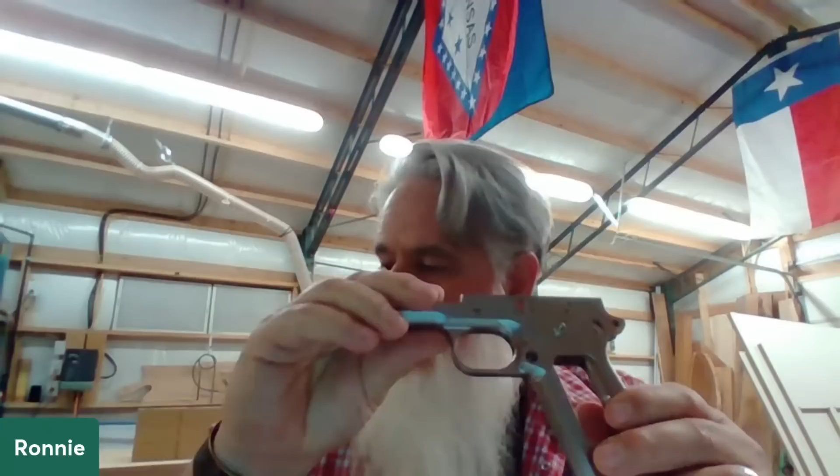And I've got kind of a grip here. The original file had some beveling off at the bottom for the magazine, and up here at the top, and on the back side, the flip side, it pocketed out a bunch of that. So the STL file I sent you later today has been cleaned up some from the original. I wanted to point that out in case you bring it up and ask where those four pockets went that we were going to remove. Okay, so I have the old and the new, so let's...

But having said all that, Laney, I would really like to learn how you take that first model and how I can manipulate it without having to get an engineer involved, if that makes sense. Yeah, absolutely, and that's great. What I'm going to do is compare apples to apples here, have the new and the old, and we'll look at both of them kind of side-by-side. Perfect, all right, so once again, here we go guys.

Let me jump up here in front of everyone for just a moment. Oh man, I still have the digital wood carver green going on, I've got to change that one day back again to our gold. Let's see here.

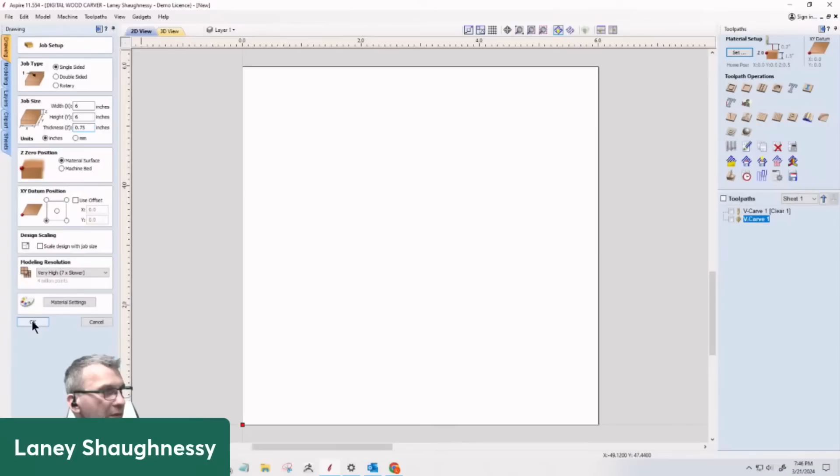And let's go 0.265. I'm going to keep that, let's see, 0.275282. Let's go 3/8, 0.375. We'll mill it down to what we need when we cut out the parts. Okay, so that was wrong. Let's go back in there one more time.

Hold that shift, and I want to set this to very high on my settings, very high on that model resolution. Now here's the kicker, ladies and gentlemen: you cannot improve the quality of an existing model. If the model is made in a low resolution and it's just a crappy model, you can't make it any better by turning up your resolution. So I don't know what these models are, but we're about to find out.

So we're going to go into the modeling tab here and import a component or 3D model. We're going to go with the original left grip from the other day for right now. When this comes in, it comes in upside down, so what we are seeing right now are those 4 pockets - we're seeing the bottom side of this model. So the first thing I'm going to do is get into a Z view up here in the top right corner.

Let me turn on my mouse so people can see where my mouse is on the screen. All right, so here's my mouse on the screen. We're going to get ourselves into a top view, so imagine we're looking over the table down on our board.

Now the model is currently in metric, so it's going to import in metric here. I'm going to scale metric to inches, millimeters to inches, to get us into our size based on what this model was created on. Now I'm going to hit mute on some of you guys' mics for now while I'm demonstrating, just so we don't pick up any TV noise and all that stuff. Once I've scaled the millimeter to inches, it brings me to what it was created in inches. I'm going to center this.

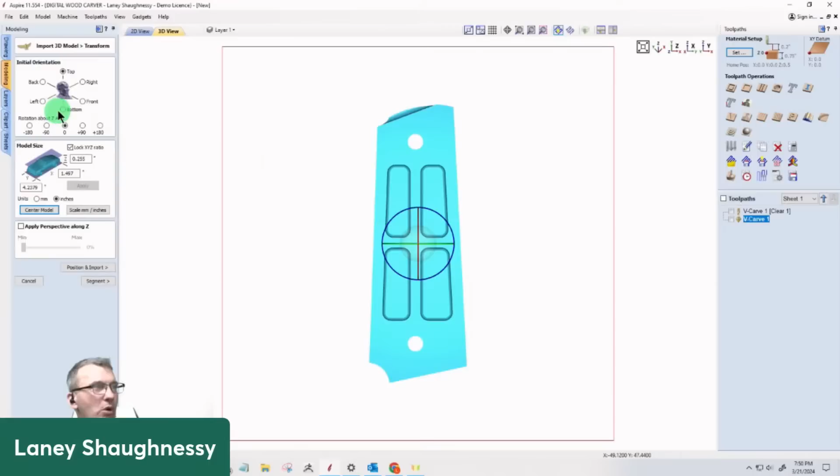Okay, now I do not want to be seeing the back side of this. I want to see the top side, but this top view they created it upside down, so I'm going to turn it to a bottom view so we're looking at the top side here. And I'm going to make sure I'm centered again, and position this.

I'm going to slide the slide bar all the way to the bottom, and discard anything below the 0 plane. If I look at it from the side view, there should be nothing below the 0 plane. The 0 plane is this black line right here. There should be nothing below it. So let's import that in.

Now, when it imports in and everything, let me switch my material for a moment. Hold that thought for one second. I want to just go with kind of a clean material for right now. We'll go with that.

Bear with me just a moment. There we go. I had some previous things in this project I need to go in and delete. Bear with me just a second.

Okay, hopefully everybody can see that. This is the grip that we brought in, and if we look at the back side, those pockets are gone. So we're not dealing with those, we don't have to deal with them.

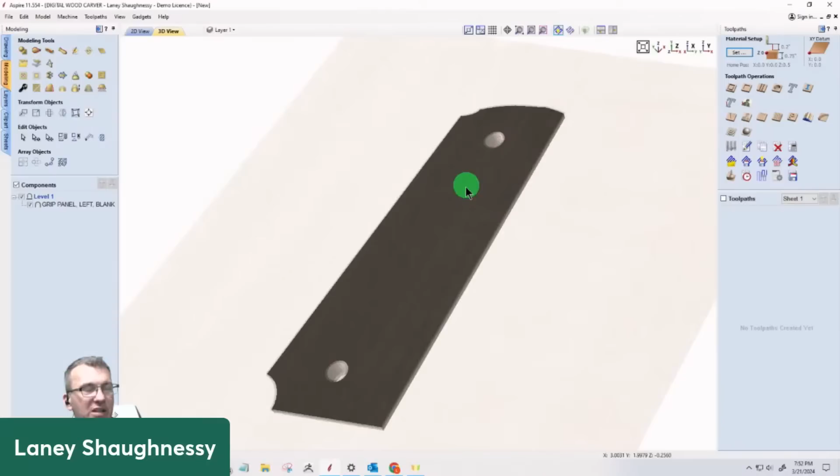That's kind of instantaneous on this. We're going to be cutting this out of the bottom of our material. Now, if we would have set this up as a two-sided job, and had it split to where those pockets were on one side and the rest were on the other, then they would be in there to deal with. But just by bringing them in, it erases them, anything on that bottom side, Ronnie.

If you needed them in there, then we would have to set it up as a two-sided job kind of thing, but I believe you're wanting to eliminate those. True or false? True. Okay, and in the new one, they are eliminated. Good, so that's just that simple. Upon import, they'll be eliminated.

When we bring that model up above, that single-sided job, everything on the bottom just gets taken out.

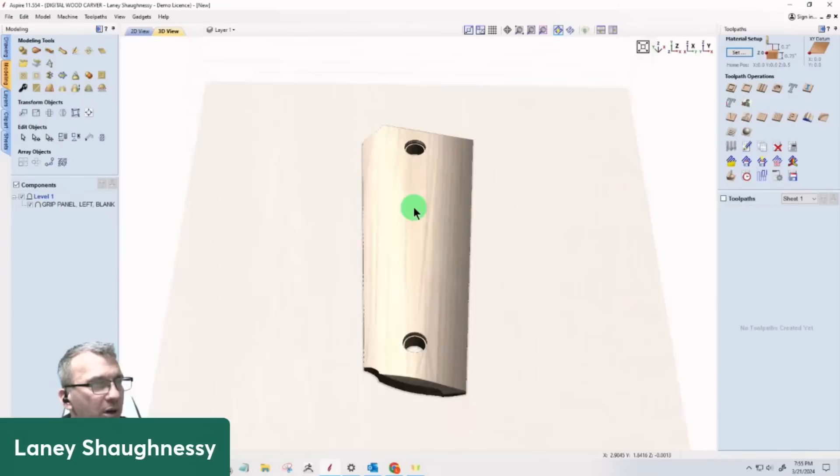Alright, and then we have our two screw holes. Now, these are part of the model, they've already got the screw holes, and they've got this recess and everything in here already. And we would have to try to find their dimensions and things like that, and see if they're on, right? If I say on, if they were created properly, proper depths, proper thicknesses, and all that stuff.

What I'm pretty much seeing here, Ronnie, is the way I would approach this is in the 2D view here.

I'm going to select on the model. So we have our grayscale here. The first thing I'm going to do is create a vector boundary, and on that boundary it's going to create my outline profile, and then my screw hole just on the inside of that hole. I don't necessarily need the outside because I can do offsets when creating the vectors myself, but at least I have a position location for them. Now, once I had those vectors, with the changes you're wanting to make, I would pull...

Let's try that again without the model selected. Let's turn that off. I'll hold the control key down and just drag out a copy here. So first things first, number one, you wanted to remove this cove.

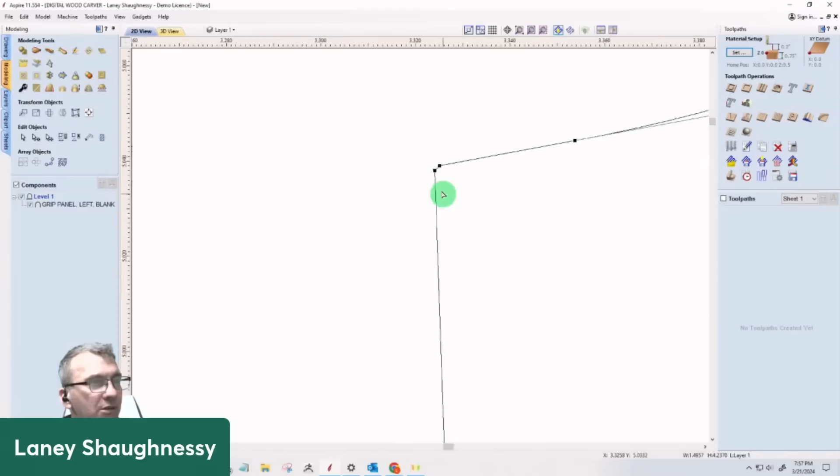I'm going to ungroup the vector, go into node editing, and zoom in. There's a little kick out there too - I'm actually going to take that all out. I'm going to cut the vector here, zoom in, cut the vector here, and delete that vector.

From there, I'm going to use the extend tool in the drawing tabs. I'll click on this vector first and this vector second, and it's going to extend and rebuild that corner.

Now once that's done, if I needed it rounded off, then I could do a fillet. Just as an example, so everyone understands what I'm talking about - first, I want to make sure it's a closed vector that I just created with the extend tool. And if I needed it rounded off, let's say for instance I want a 1/8 inch radius there, I can click on that and round it off. Do you know what I mean? If it needed to be.

I don't know if it needs to be or not, but that's what we would do. We would extend - the extend tool takes this line and extends it to a common point of intersection to recreate that corner. Then from there, if that corner needed to be rounded off, I could do that with a fillet tool.

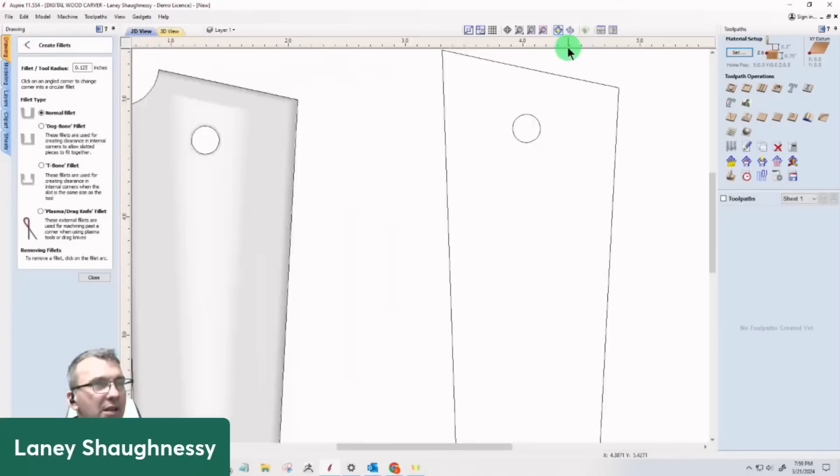Okay, now coming up here at the top, this shape - I'm assuming we still need this kick out and everything needs to be here, correct? Correct. Okay, now one of the things I would do is look at the condition of the vectors, make sure there's nothing crazy going on that's not supposed to be there.

When we're looking at the model, if I zoom in on this grip, let's go to the 3D view. Let me spin this around this way, zoom in, bear with me. I don't know if you can see that little booger there - it shouldn't be there, it's a piece of material that doesn't need to be there. But when the vector was drawn, it tried to outline that. So once again, it does not need to be there.

We're going to go into node editing, come over - let me hit close. Zoom in, we're going to go in and cut the vector. I'm actually going to cut it back here, over here, get on our corner, cut it there, delete that corner, and then again use the extend tool - click on this line first, this line second, to rebuild that back corner.

So does it always make a difference, the order of where you click on that? Nope, does not make a difference which line you click first.

Basically what's happening - let me undo that for a second - if I hover my mouse in the extend tool here, you'll see it shoots this line out to infinity. And if I hover my mouse here, you can see it shoots that one out to infinity too. Well, there's going to be a common point of intersection. What this does is, if I click on this line first - and it doesn't matter which line I select first - and I click on this, basically where those two lines intersect, that's where it creates them to.

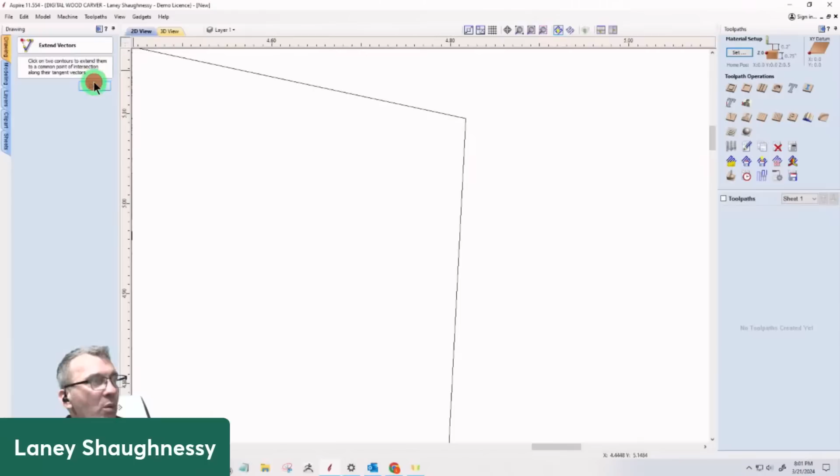Now, what we always want to do after extending a line - it doesn't mean we actually joined the vector. So we always want to follow up with the join tool and make sure it did close itself. If not, just hit join and close it. Okay, so we've redrawn those two corners.

For the most part, everything looks good. But what I would feel more comfortable doing is, because of these little zigzag edges of the model, the lines where the software traced the model trying to draw those lines, what I prefer to do is in node editing, delete this span, and rejoin it with a straight line. So I'm redrawing that line, which gets rid of any zigzags that might have occurred in the model.

I'm going to do the same thing over here. I'm going to delete this span, and then rejoin with a straight line. All I'm doing is making sure that my vector line from point A to B has no funky deviancies because the model had some pixelating, you know what I mean. So I'm not going too crazy with that, but that's what we're doing here.

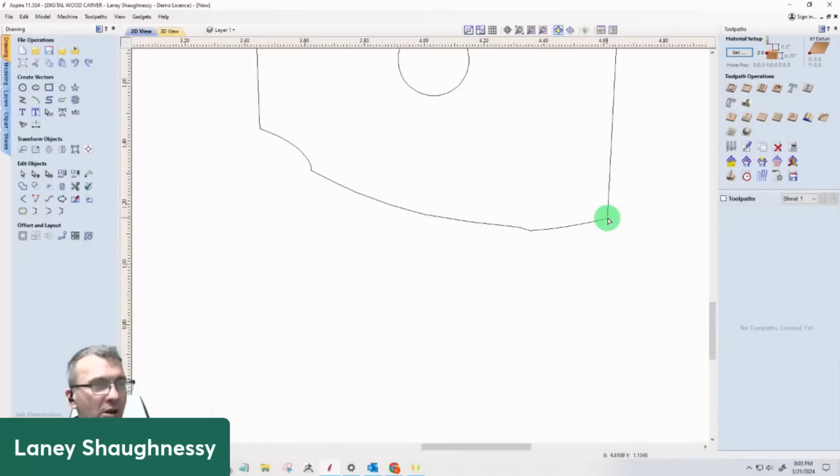I do not believe it should be just a single arc from here to here. I do believe it has a step down. And if you wanted to verify that, Ron, it's on the back side of the handle. I believe that is the back side. Yeah, just off the backside corner there's a slight step down before it goes into an arc. Is that correct? That is correct. Okay good, so we want to keep that.

Okay, now on our inside holes, Ron said the screw head pocket, which is the outer top, let's call it the countersink, has a diameter of 0.304 with a recess of 0.052. And then the screw hole, which would be the inside hole, has a diameter of 0.232, right?

So if I select this circle here and we look at the size tool, we're pretty close. It's not a perfect circle because, again, it's a tracing - the software tried to trace what it saw, right? So it's 0.2371, at least we're in that 2.3 range, right?

But we're actually going to run - I'm going to go with your numbers on these holes. So I'm actually going to select both of these, and I'm going to check the box that says scale the items individually. I just want to do them both at the same time.

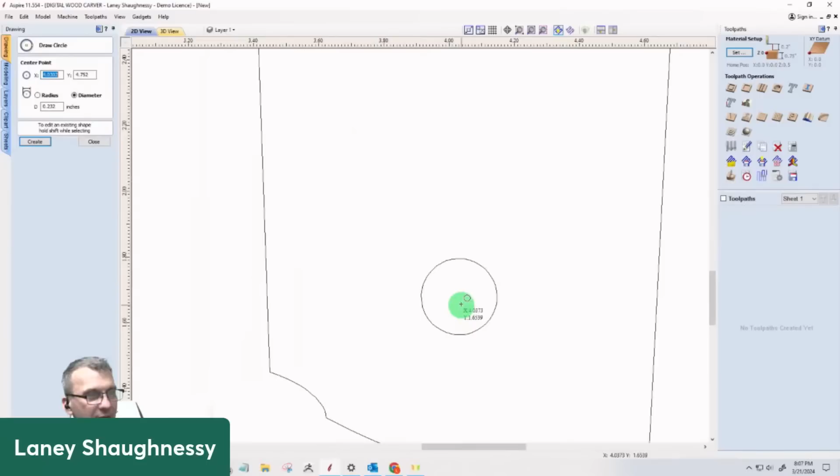All right, let's go back over here. Circle tool, 0.232, get right to the center of it, it'll snap to the center. Click, zoom in, find a place where it deviates so we can select. See, there's a bad deviation there. We can select the other one. Select that outer bad one and delete.

Now I know this is 0.232. Now I know when I offset this outward, when I select that circle and go to the size tool, I'm at 0.304, right? Clean up what needs to be cleaned up and never take anything for granted, right?

So I did the trace of the model. It created what it saw. I thought, hey, we're off by a number, let's change the number. Still working on that vector that the software traced, right? And there was still some deviation, it changed it down to the 0.232 size, but there was still some deviation in it. And when we offset it, that offset got deviated as well. So we created brand new clean circles, offset, everything is nice and clean. And positions and all, we're working off of the original vectors, we're just snapping to the center of those things.

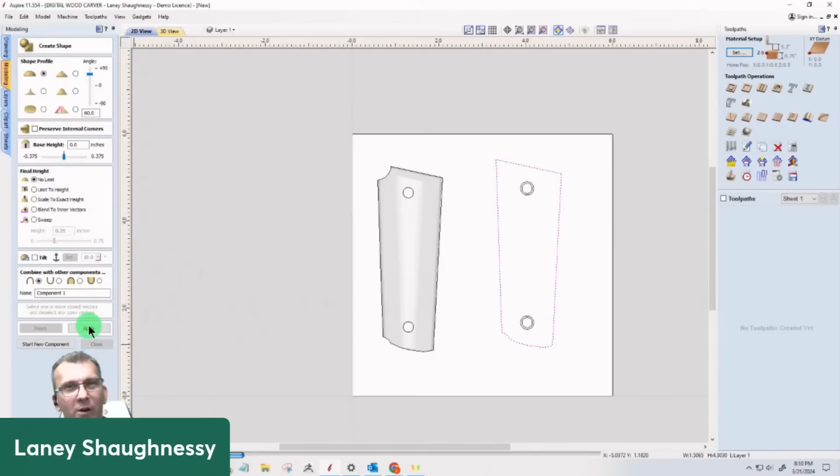Look at this in the 3D view. Oops, hold on a second. Let me recreate this. Hold on a second, all right, and then we get into the 3D view of this.

What's happened is basically we kind of created a pillow top, if you will, because this is a closed vector, it's trying to dome both sides of the corner. So on each one of those ends in the four corners, it's trying to create a dome this way and this way until it gets to the middle, to the main dome, and it creates what's called a pillow top, like a cushion on a pillow. We don't need this. This grip needs to have a nice arch, a nice shallow arch to it. So we cannot create the shape on the closed vectors.

We need to kind of open them up. And what we're going to do is the arc here, we're going to go with the height of the grip, we're going to use the number 0.265 as our height. And based on the width between the lines, how they're wide on this end and narrow on this end,

we're going to do a 2-rail sweep. And when the arch that we draw sweeps, it will scale itself accordingly based on how close or far apart the model is. It'll take the proper taper that it needs for the height. We're slightly higher on this end than we are on this end, but it's not much, just that slight kind of taper. There's not a whole lot, it's pretty consistent, but there is a little bit of deviation.

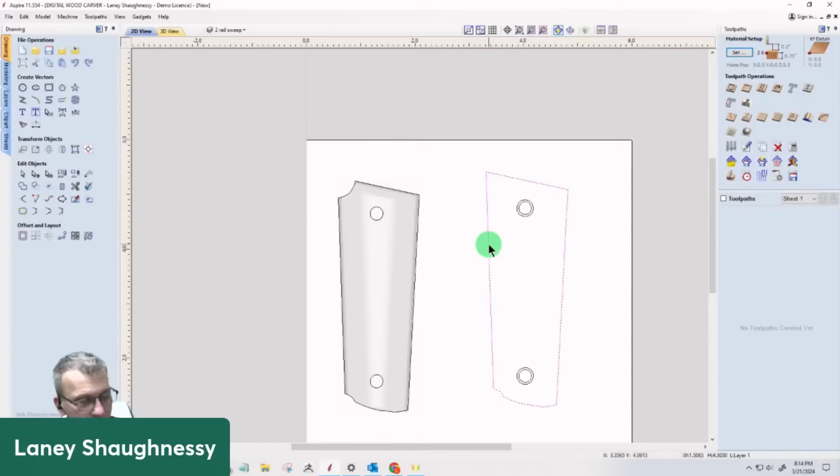As long as that layer is active, when I copy Control C, Control V, it's going to paste that copy on that new layer, so I can now turn off mine. Did it not copy onto the new layer? What's up with that? All right, that's okay, I will sit there and move it to that new layer. Sorry, ladies and gentlemen, I thought it would copy right onto that active layer. It should have, I think it should have. I don't know why it didn't.

But now I can turn the originals off. I need them, they're not going away, I can just turn them off. Now I can come into node editing and cut the vector. By the way, everything that we're doing on the left, rinse and repeat for the right, or you could mirror this as well too for the right. It doesn't matter, but the right might have some deviations depending on what type of slides and accessories and all, so keep that in mind too.

But I want to come back to this corner and cut the vector there and cut the vector here. Now, I just need paths, right? So I'm going to, on these copies here, just get rid of the ends, keeping my paths the same, but I need them to be a little bit longer because when I clear everything outside of the original vector, I need something for it to be able to erase. I don't need it to go right to the end of these lines.

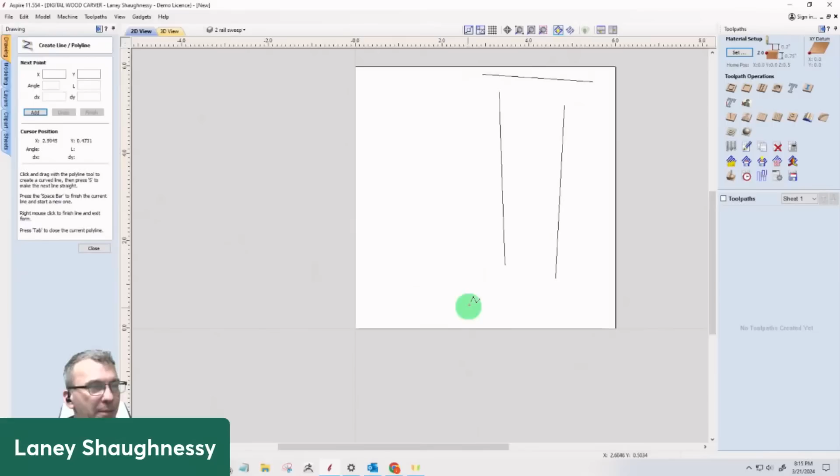So what I'm going to do is draw a line across the top, doesn't matter where, and draw a line across the bottom. I'm going to use my extend tool to extend this line to here, that line to there, this line to here, and this line to here. All I'm doing is making them just a little bit longer, same orientation that they're heading, just a little bit longer. And then once I've done that, I'm going to take the select tool and get rid of the ends. I still need the two rails to be open for a two rail sweep.

Now we are going to create a profile. Ronnie said that the grips have a height of 0.265. Now, there's not just the round at the top, there's also a little bit - I mean it's so small, but there's a little bit of straight meat kind of, and then it arches into the arch on this grip. So we've got to take that into account. So what I want to do is not account for it in my arch, but when the model's done, I will add base meat to it last.

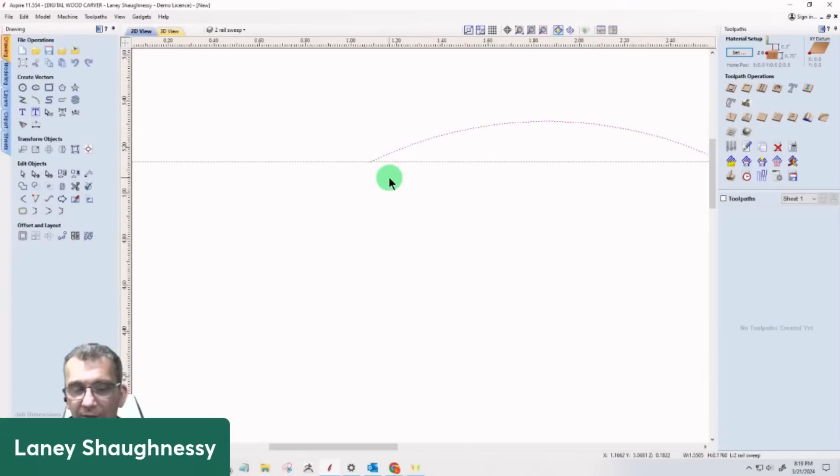Go ahead, Charlie. If you're talking to me, Charlie, turn your mic on. Charlie, are you trying to talk to me? No? Oh, he might be on the other line. I don't know. All right, Charlie, I thought you might have been talking to me.

Okay, so on my arc height, I want it to be at least 0.2.

Okay, ladies and gentlemen, this is one of those times where I'm not frozen. You all should be able to see me and everything, but my computer that runs the design software has decided to lock up. And it's one of those things that when it does that, it is locked up. So give me just a second.

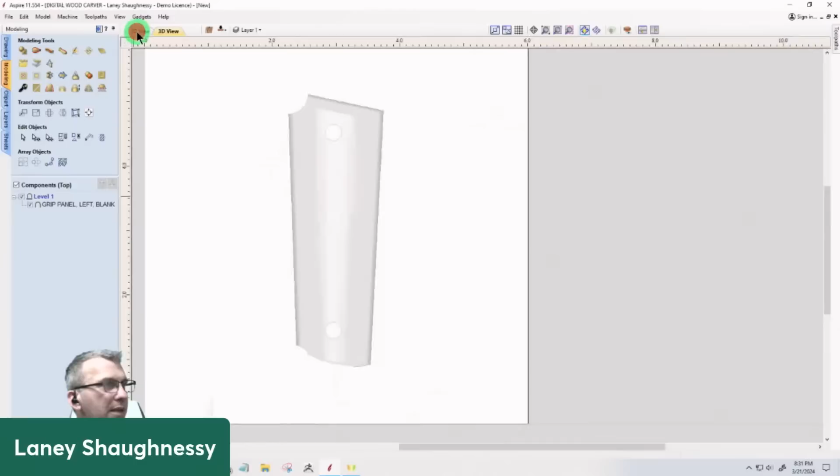Okay, all right, in the 2D view I'm going to trace the component. I'm going to take that and slide it over to the right. Select my vectors there, hold down the control key, drag that back over here.

We're going to ungroup that. We're going to go into the circle tool, 232 diameter. I'm going to go ahead and snap to the center of this, come in there and get rid of that. Stand by, there we go. Circle tool, snap.

Now, that's not your outside diameter of the circle, was it? Did you change the setting on your circle when you clicked into it? Give me just a second - stand by to answer that question, give me a moment.

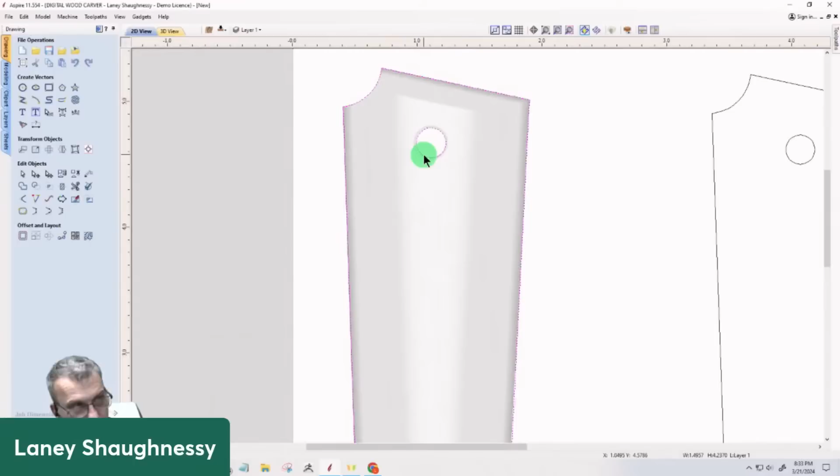.232 is my inside diameter. That inside diameter, John, which should be 0.232, yeah. 0.232, so this circle here, ungroup, was 0.2394. And so this 0.232 was just snapped to the center of that, in the copy, and just put in place. With me? I know it probably looks different from the first go around, right?

Node editing - we're going to cut the vector on this corner and this corner. And I'm going to use the extend tool to extend this corner here.

Okay, now I'm going to go into node editing. I'm going to cut the vector here, and here, there, and there.

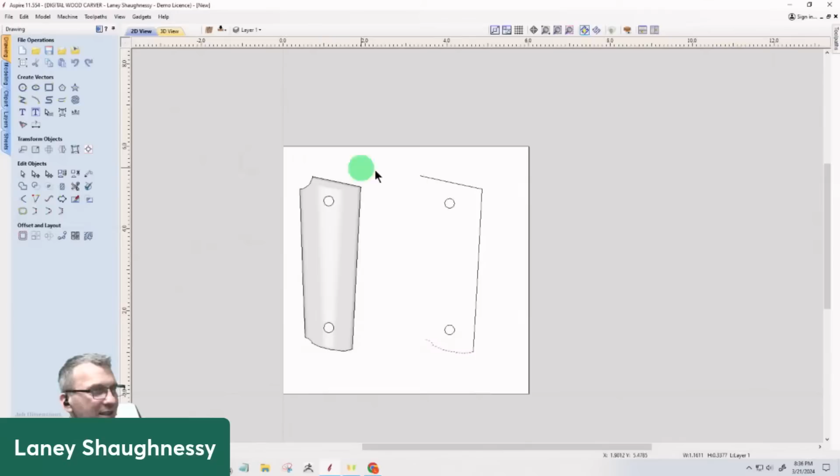Okay, so that - I'm going to, bear with me a second - I'm going to connect those two together just for a moment, so that way I can join this with a straight line on one side. There we go.

And then go back into node editing, cut that vector on the other side. Cut that vector, delete that span - could have just deleted the span, that's fine. And then join with a straight line. Okay, so this is where we were up until we selected this.

Control C, Control V, copy, paste, and then I'm going to move this to a new layer, and I'm going to call this my 2-rail sweep.

Can I ask a quick question, Laney? Yes. Did you create the recess? Not yet - the offset for the holes? Not yet, yeah, just take a hole right now. So we're going to do that. We'll do that, let's do it right now before we copy and paste. Well, no, that's fine, I could have copied and pasted because that's just the 2-rail sweep. Give me just a second.

Okay, let me turn this one off for just a moment. All right, on the holes here, we're going to do our offset in outward direction, and that'll be the vectors for the recess. To create the offset, we take our 0.304, subtract the 0.232, the answer gets divided by 2, and that number gets offset, and then it creates that offset for a total of the 304. So when we select this, when we look at the size, we should be at 0.304.

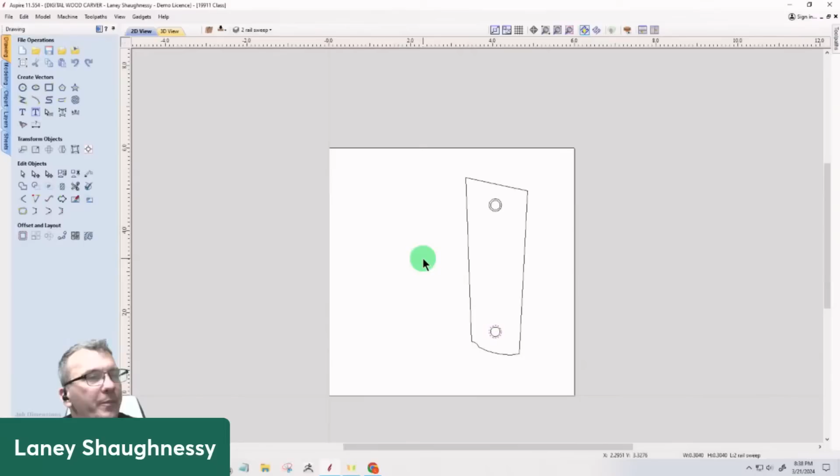All right, now the copy here that we're in, I'm going to go ahead and draw a line up here, draw a line down here. I'm going to go into node editing, and I'm going to cut the vector on this end.

Did someone just call my name?

I'm going to cut the vector on this end. Get rid of that, I don't need the holes there for right now, those are on the originals. I'm going to use the extend tool to extend my drive rails for my 2-rail sweep, just to make them longer. The only purpose for doing that is to make the sweep slightly longer so I can trim it to size.

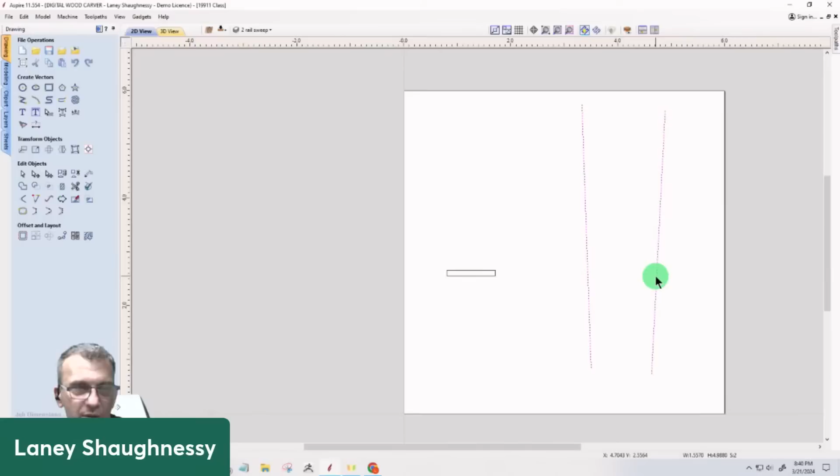Now let's look at John's method here. Our overall height is going to be 0.265. Now my overall width on here is 1.557, and the actual width of the grips and everything, according to Ron's numbers, is 1.572. This is the width of the grips based on the model. So we got to figure out which one of those we're going to use, but for right now I'm just going to use this. So 1.557 by 0.265, that's what my rectangle here needs to be.

1.557, 0.265. Not that, make sure you have the right vector selected when you do stuff like that. 1.557, 0.265. Okay.

Now John was describing that he would create his leg. So let's say I have a straight line, and let's say that line needs to be a 16th of an inch. So I'm going to create a line 0.0625 inches tall. Give me just a second, I'm going to do it. My mouse is shaky. And then space bar. I'm going to select that line.

First, I'm going to draw a middle line here. Let me get a middle line right there. Don't do that - if you're going to draw a middle line for flipping and mirroring, make sure it's straight as an arrow. Okay, I'm going to take this line I just drew, select this center line, and mirror it by flipping about that line. So it puts another one over here, and make sure that we're flipping a copy.

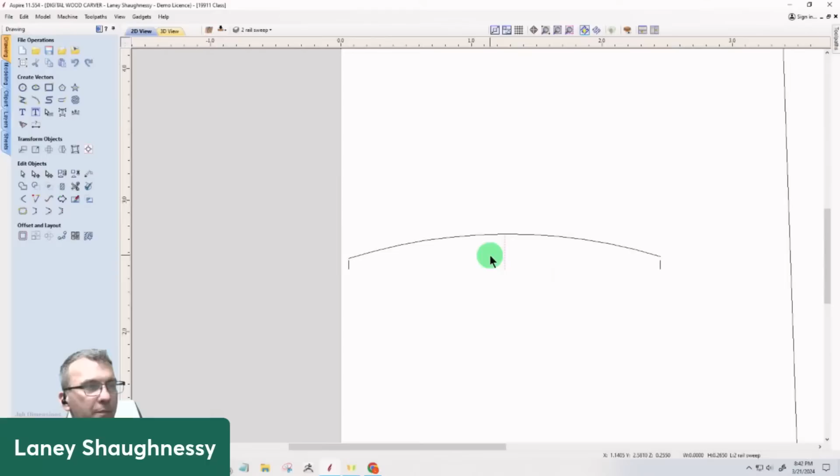Now John takes his arc tool at that point, and he snaps to the top of those lines and then pulls an arc up to the height of his box here. And when it's all said and done - I missed my mark. Hold on a second, let me go back to my arc tool. Let me get rid of this line for a second, I don't need it anymore now. Arc tool.

Make sure that we are snapping to the end of our lines, ladies and gentlemen. Am I in the line tool? Of course I'm in the line tool. Arc tool would help. Let's do it again. Get in that middle. And now I should be able to get rid of that box. All right, close enough - not really, just kidding.

Why is my snap - we're going to try this again. There's the end point, I'm confident on that one. Let me zoom in, get close and personal with this. That should be my end point. All right, third time's a charm. I'm happy with that one.

And so John would take that and make sure it's one vector, those three vectors, and that's what he would sweep along the 2-rail sweep. Am I correct in that, John? In what you were describing? Yes, I would make one for the top and one for the bottom, and then sweep it across it.

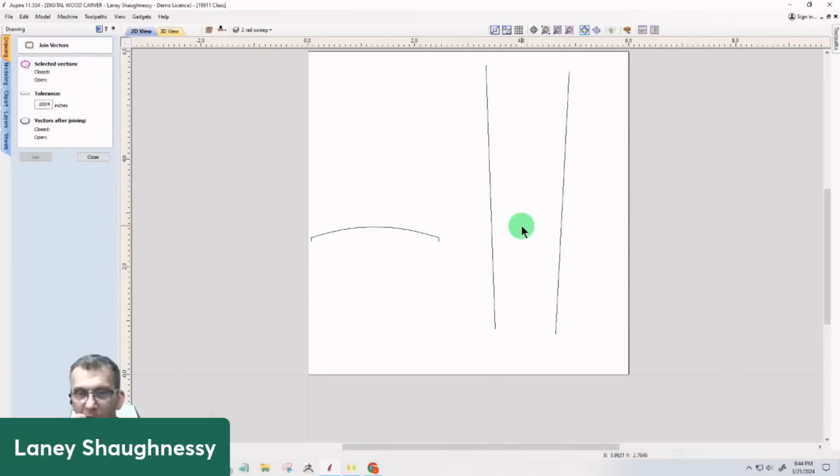One for the top and one for the bottom. Yeah, like one on the very top of the two lines and one at the bottom of the two lines, because the bottom is narrower. I could be wrong. I get what you're saying. And if we make one for the top, one for the bottom, then when we're in the 2-rail sweep, we don't have to use the option to scale the cross sections with the width. We can tell it to keep its current scale, right?

Because what I do is I take and click on the profile, I guess you would call it, and then click on the line and place it on the line, and then take the other one and do the same thing. It's probably what you're doing - you're just doing it the easier way than what I do it.

When we use our drive rails here, just know that when I have this scale cross section with width, it's going to scale this down to that second copy you're making. If I wanted to not scale and keep a consistent height all the way across, I would create the two, and that way it stays based on what I scale it to.

When we do it this way, with our 2 rail sweep, when we look at the 3D model, it creates that curve. Now that 16th, according to from here versus here, that's a lot more than a 16th of an inch on that side meat. So that is a significant difference between the two as far as the thickness is concerned.

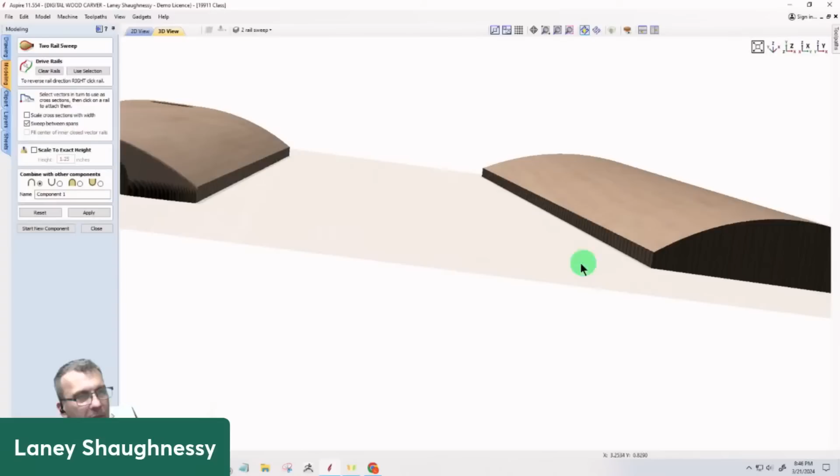Now, because I did not scale with the cross sections, this brings me more in line here on the back side, but on the front side, no. This is where John's method of creating these two, the transition between the two, comes into play.

With John's method, since I'm not using the scale cross section - because the scale cross section doesn't give me the right heights - if I turn that off, then John's method... let's get rid of that. Does it matter that your profile is wider than the bottom up at the top? That whole profile looks a lot wider.

It is a lot wider. I think you had the link on for XY when you were setting that box. Hold on a second - when I was drawing the box? Yeah, I think the link was on. It should be... hold on a second. 1.557. Yeah, and when you set that and then change the height, 2.385 - that's much wider. Hold on, let me do this again.

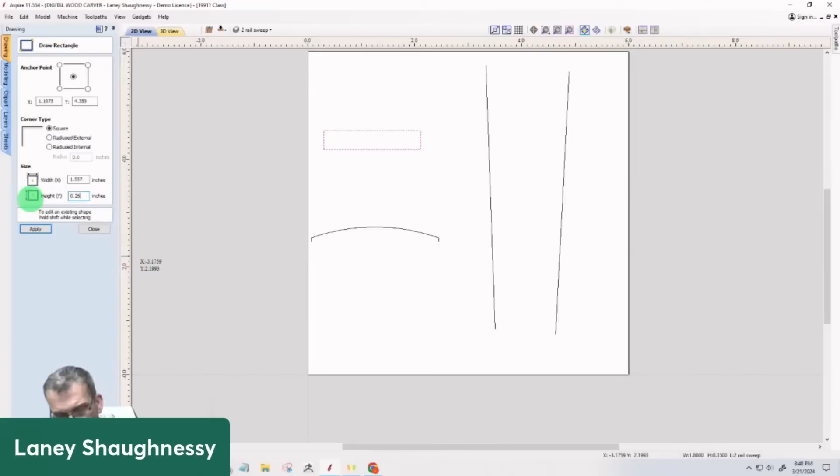Okay. 1.557. 0.265. That's my box.

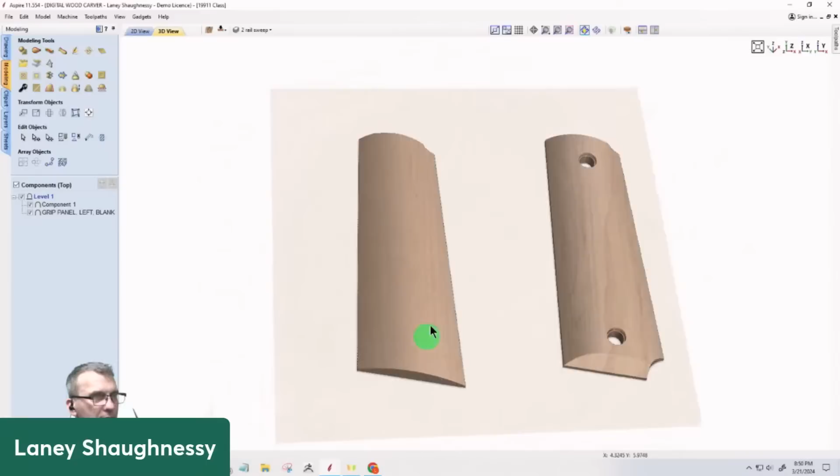All right, so a little bit more meat height is what we need, because that is my 16th that I drew there. You said what, 0.08 what now? 0.088. Okay, 0.088 minus 0.0625 equals...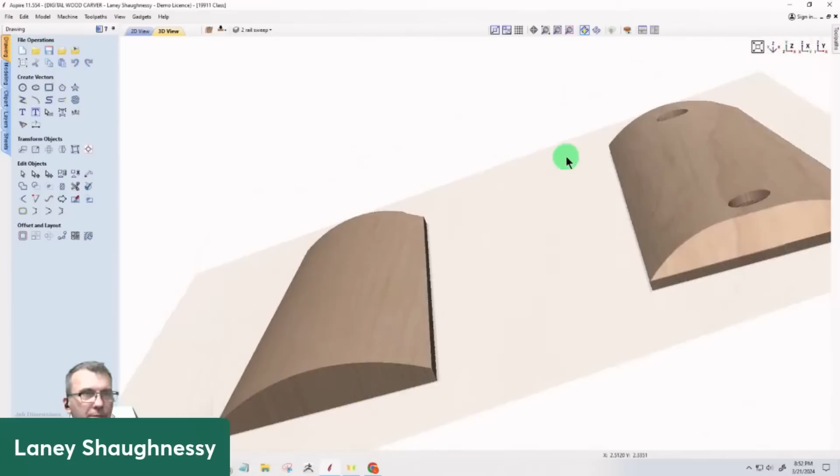His back end looks like it's got a flattening on the top. That end, right - there's a chamfer. Well, no, I mean see right where the screw hole is? It looks like it's flat right there. If you look at that end profile... maybe not, maybe it's just the way the picture looks. See where yours looks real hard.

Yeah, there's a piece of grain - I don't know if you can see the dark grain right here. It gives it kind of a flat appearance, and also the chamfer gives us that optical illusion of it being flat here, but it's arched.

Okay, all right, now let's take a look at if I were to select this and look at the overall height of this - 0.255 overall. And this, 0.257 on the shape height.

And then that 0.08 shape height is from the top of this straight edge to the top of the highest part of the model, 2574. And then this meat here is that 0.08, whatever it was, 0.08 something.

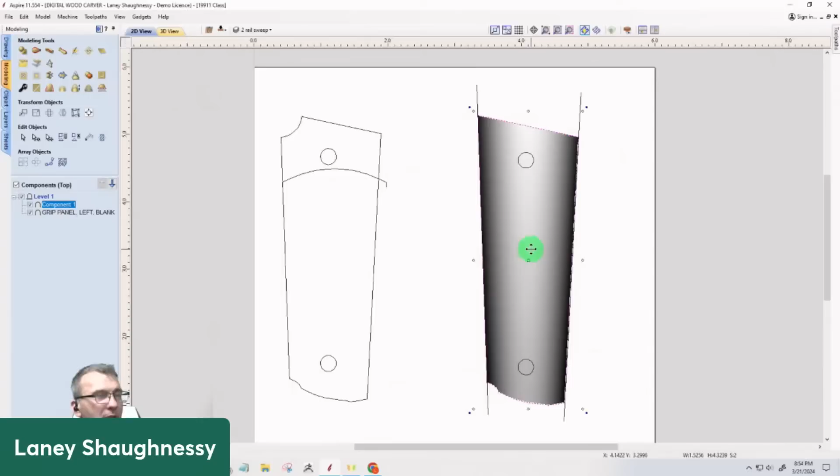Okay, so this is going to be our model height here. Now the holes and stuff aren't here - they're screw holes and everything. Make sure our vectors are turned back on. The model here, I'm going to go ahead and move this model to that layer 1, so I can turn off the 2-rail sweep vectors and everything, and the model - I'm going to go ahead and turn that off just for a second.

My offset little screws, when I hit undo, my undo disappeared on those. Give me just a second to save. But let me go offset outward. There we go. File save. And let me take those vectors and move them back to layer 1.

All right, I've got the model turned off for the moment so I can see the vectors. Now, the recess that goes over the pegs on the back side of this model - I'm going to assume it's the same size as this 0.034 recess here, but that would probably be the wrong assumption. If I go into the original model and look at this in the 3D view, it's not really going to show me that other side, because when I imported the model, I didn't import both sides.

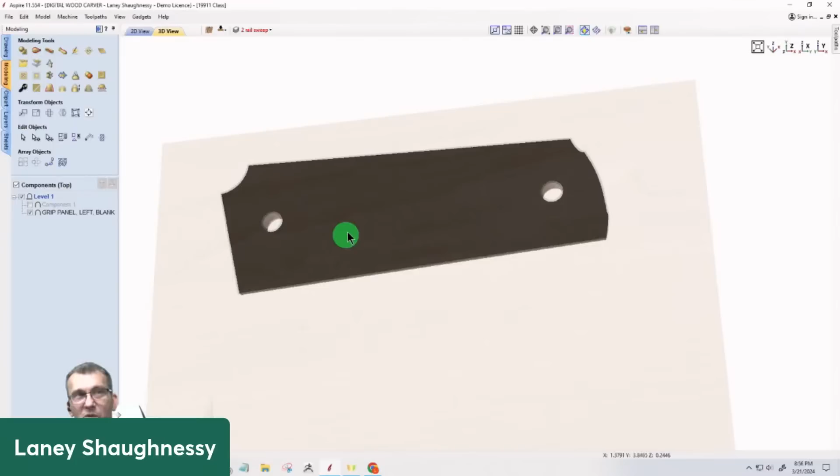So I'm going to re-import this really quickly, this model right here. I'm just going to take this one for the moment and move it over here. I'm going to re-import this model again. Only thing I'm changing this time is the job is set up as a 2-sided job now. So I'm going to come in here and go scale metric to inches, center model, bottom. Nothing's changed as far as what I'm doing here - the only difference is I'm going to create both sides of this.

Let me get into my zero plane here. I'm not going to have too much of an overcut, but this here - I need to be able to overcut the line when I'm on side 2. I need to be able to overcut into the pockets of this recess. So I'm just going to give myself that 0.08 overcut distance. 0.08 is fine to start off with now.

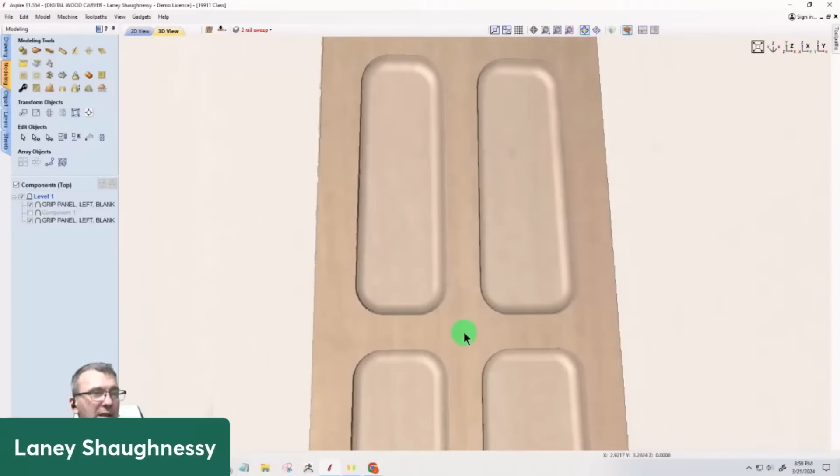Now, as far as this is concerned on the back side, if I need these gone, then I can go into my 2D view. Got to switch over to side 2. And let me first get everything lined up on side 1 first. Give me just a second.

All right, let me switch over to side 2. Of course, side 2 doesn't move with side 1. We'll call that for a moment. I don't care about this model here because we're recreating a new one over here, but I do care about showing how to get rid of these pockets on the 3D view when we're looking at this here.

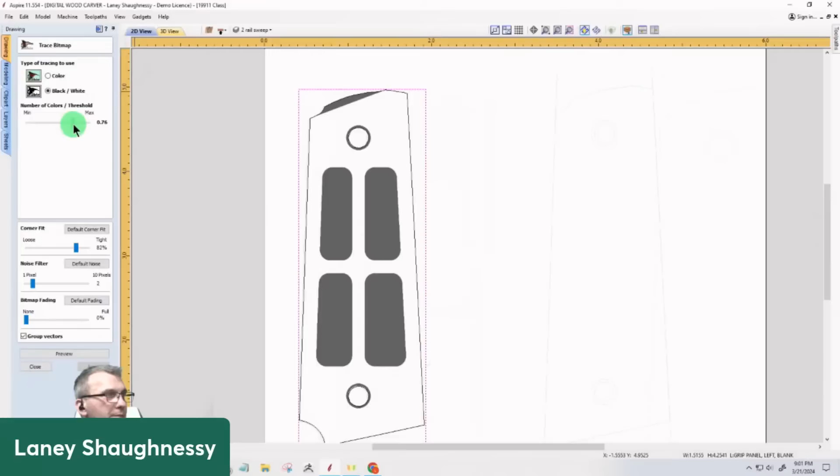So when I'm in the 2D view, I can't just create a vector boundary, because it's only going to create the vector boundary on the outside, not in here. So what I actually need to do is use the trace bitmap tool, turn the fading off. I'll turn this up to 76 as kind of my threshold. Preview, apply, and close to create those additional vectors that I need.

Okay, on here, if I select these vectors and ungroup them - just these vectors - and clear everything out inside those vectors. Bear with me a second. In the 3D view, you should only be looking at one side right now. Let me turn off the other side for just a moment.

In the 3D view, I should have this hole here, right - these holes. Now, I'm going to offset them, all four of them, just a few thousandths of an inch. Offset - where's my offset? In the drawing tools. Offset outward. Oh hell, I'll go point a 32nd, that's fine. And I'm going to rebuild that shape with a flat shape, so it's going to be a flat shape, and I'm going to give it some height. In this case, I'm just going to go the 0.08 for right now.

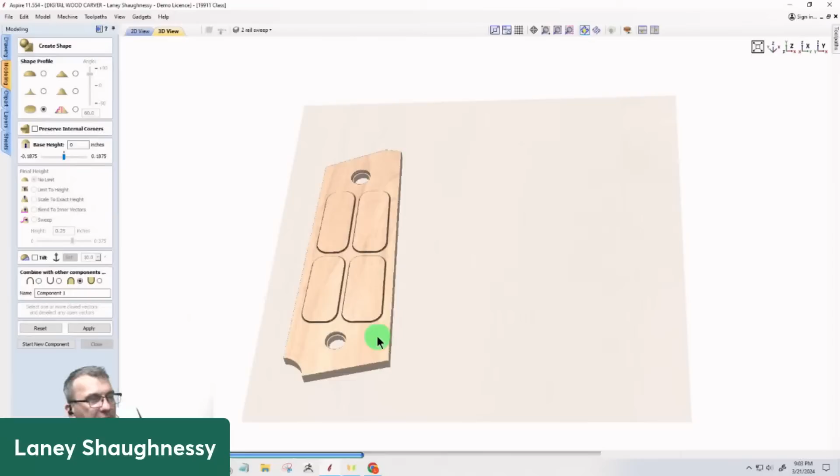And it should fill in, right? Well, all right, so close that.

Okay, so that's how we would get rid of those pockets. Basically, draw around the pockets, clear out that material, offset those vectors, because if we don't offset, then it creates like a little inlay, right? It's glued into the pockets and all. We want it to build in and merge. We're filling in that area. So we offset outward, rebuild the shape up, and it blends in with the existing model.

To fill that in, right? Fair enough? Fair enough. Okay. That's how we would do that.

Now, here, this outside recess here, this is the new side here. We're coming in at 0.2944 inches in diameter. So,

Can those other values on the top side be copied over to this back, or? Yeah, sure. Oh, yeah, absolutely, we're going to do that. Those vectors and everything, they can be copied over for sure.

But this number is what I needed, right? So it's 2944, of the two of the worst evils, I'm going to go with 2944. You can get exact with your micrometer and all that stuff. But the reason why I'm not doing anything with this is because this is our working model, over here.

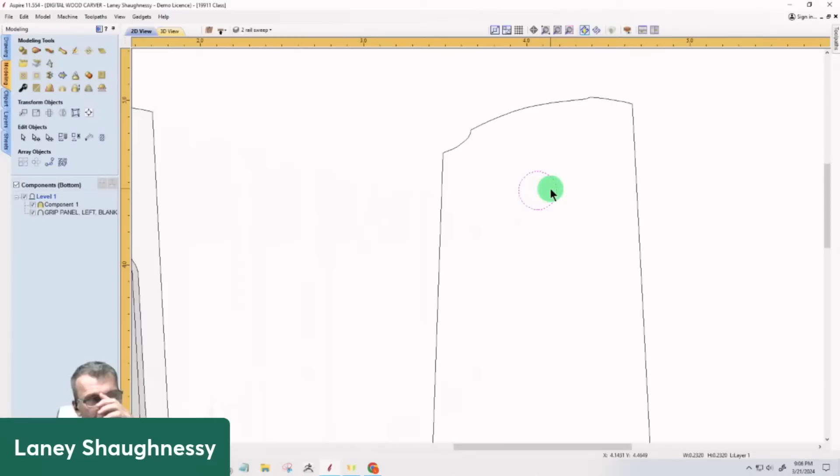Once again, just like we did on the other side, I'm going to select both of these. I'm going to offset, offset outward. The number that I want to reach, 0.29, I'll just go 5, minus the number that it is, 0.232, equals. That number gets divided in half, divided by 2, equals. And that is the offset amount.

That way, when I offset and I select this hole, it is 0.295. Okay? You guys with me on that? Gotcha. Now, that'll be just a simple pocket cut.

Pocket, pocket. On the other side, pocket, pocket, and then a through cut, drilling operation or pocket cut all the way through. This pocket cut is going to carve as deep as you need it to carve. This one's going to carve. You're going to have your alignment pins and flip, that kind of thing.

Now, we are going to consider the bottom of our board, side 2, as the bottom of the grip. Okay? So this grip is sitting at the bottom, not in the middle floating in the board. It's at the bottom. So when we're on the back side and we do our little pocket holes, that's where the little pegs that are sticking up on the actual frame rest. Okay, so this is the bottom.

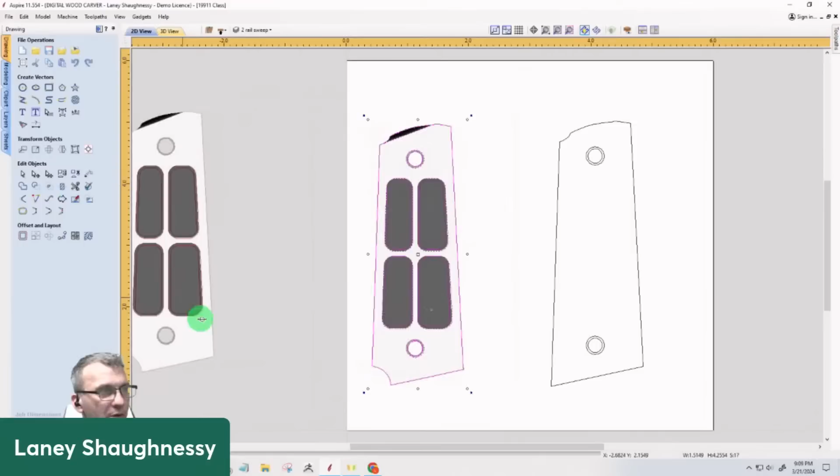I'm going to select all of this and just move it off the board for a moment. And let's imagine I've done this and I've got my left and right grips here, both of them.

Same steps. Now, true or false, Ronnie, are these both models identical for both left and right, or is there a difference because of certain type of... They'll be different because on the other side, you're going to have down in that bottom, I think it's the bottom right corner, there's a small recess for the mainspring.

And okay, then on that other one, you also have that cutout for the thumb safety. Okay, all right. So...

There's not much machining, but there is a little bit of machining on the back side of them. But same height and all that stuff, that's pretty consistent, the same, right? Yes, yeah, it is.

Exactly. All right, so on the import, here is that cutout you're talking about. We are still planning on getting rid of that chamfer on the bottom and the top that we did on the original, on the left side.

Yes, yeah. All right, so once again, scale, center, slide, create both sides. I'm going to go 0.08. Try to keep all that consistent and everything. Bring that in.

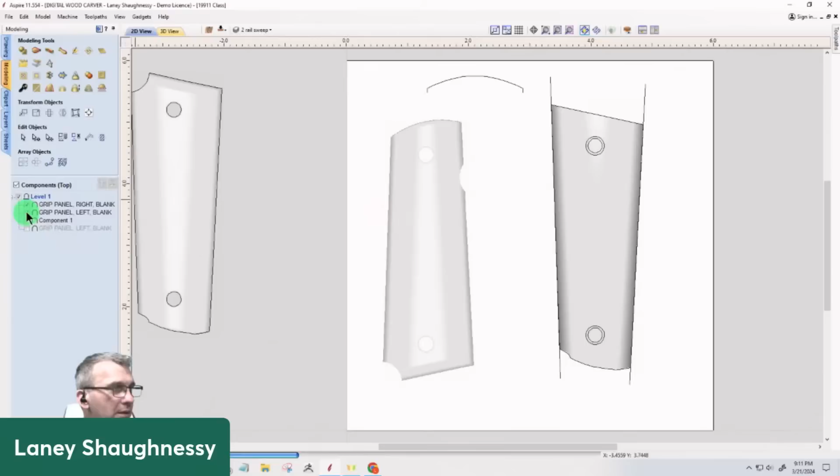Okay. Now, so things don't get all mixed and matched and confused, left and right and everything, this is our working model, okay, for the left grip, right? So what I'm going to do is I'm going to turn that model on. I'm going to turn off grip left, grip left, grip left. I'm going to turn off everything but what we just made. Okay.

All the vectors, all the layers are on, right? So I'm going to take all the vectors and everything, and what I'm going to do is select this. Well, I don't need the, let me turn off the 2-rail sweep vectors. I don't need those on. I'm going to take this and move it to its own layer.

And I'm going to call this my left grip vectors and model. Okay, left grip vectors and model. Turn off the visibility for right now and click OK.

So now my right grip, it's going to be rinse and repeat. So I'm going to come in and the first thing I'm going to do is create the vector boundary around the right grip. Okay, now make sure you don't do what I just did. Let me undo that. Make sure that whatever layer that you're in...

Make sure you create. I'm going to go right grip. I'm going to put this in that layer. Move to right grip. Did it not? The name didn't save. Hold on a minute. Right grip. It didn't like the enter. There we go.

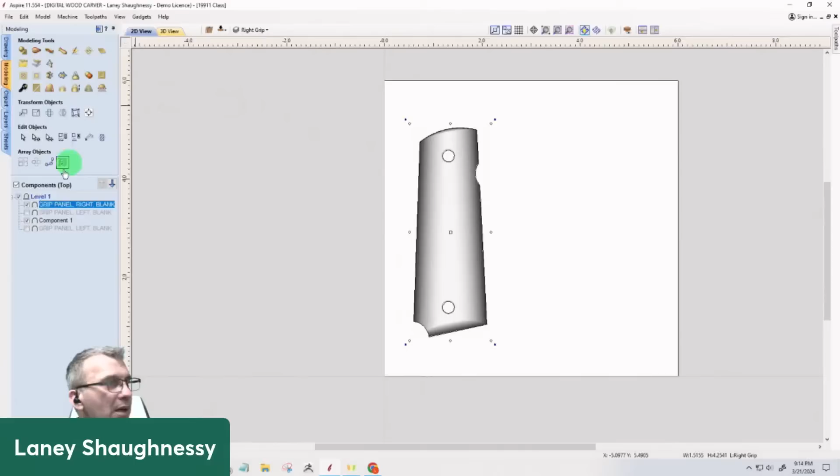On this model, we're still getting rid of this corner radius, correct? At the bottom right corner. Yes. Okay, so we'll turn this off. We're working with our vectors at the moment, so ungroup.

Node editing. Node editing is that icon right over there, or it's the N on the keyboard. Delete. Join or extend. Wake up that vector. Okay.

Now, there's a little bit of a kick down right here, and I can see that when I go into node editing mode, by this vector right here. So there's a slight kick down to here. And if I were to turn the model back on and we zoom in, the kick down is occurring right here, and it shouldn't. It should be just kind of a straight line shot and everything. It shouldn't be kind of pointing down.

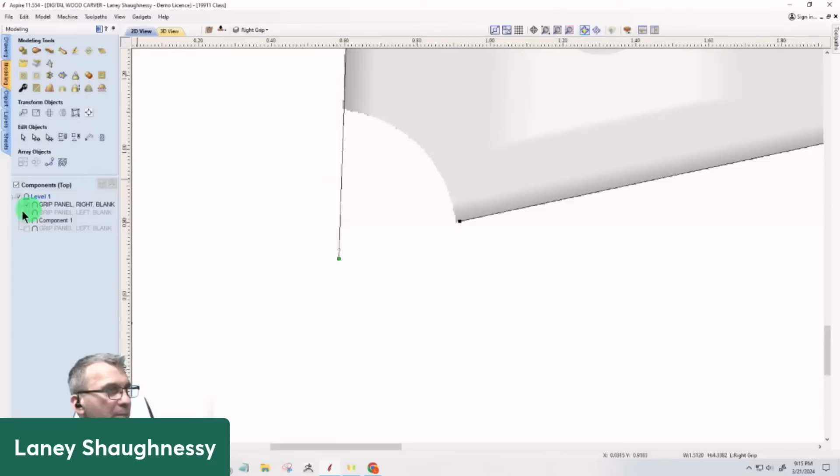So I'm going to just eliminate that point, and actually I'm going to cut the vector. Let me delete this span. And the node that was here, when I joined these two, it should have started back here. So let's go to my extend tool and extend this to here, and you can see the big difference, right? So it's a straight line. And then take my scissors and trim away that excess.

Okay, so when you're doing this, look at the vectors. Don't assume, observe, ask: is it supposed to be there? Is it not? Things like that. Because there was a little extra node right there in the original extend, it extended this line down, that line down, and so they intersected at a different point. But when we got rid of that little kick down and went back to that node, it extends the proper straight line. So always look closely at things.

And once again, because our model has kind of this zigzag pixeled edge and everything, I'm not going to take the straight lines for granted. The only difference is I'm keeping this curve here. So when I go into node editing on this, I'm actually at the end of the curve.

I'm going to cut that vector there. And at the end of the line, again, there's that kick out again. We don't need that kick out. But I'm going to cut the vector here and back here.

The first thing I need is an extension point. I'm going to use my extend tool to go from here to here to create that corner. I need that corner, but I'm going back into node editing mode to cut the vector right on that corner, because I'm going to delete this line.

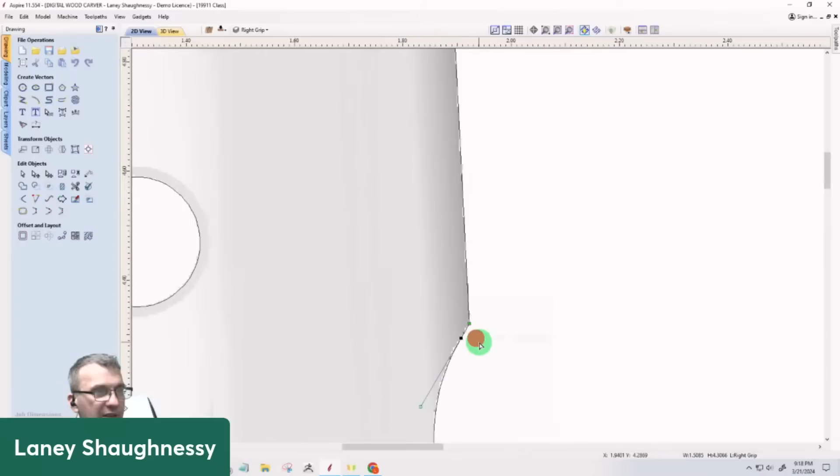I'm going to rejoin that straight line to that arc, joining with a straight line, then do the same thing on the other side of the arc. Cut the vector there and here. The lines may already be straight and all that, but because it's tracing this model, I'd like to create new vectors just for the insurance of getting a nice clean line.

A nice straight line, nice connection. So the arc, for the most part, we're going to leave as is. If you want to redraw the arc, you could, but for the most part it looks clean. Okay, so our hole, I'm assuming both pistol grip holes are going to be the same, 232, 304, all that stuff, right?

Yeah. But these vectors are the ones that were traced. You can tell by all the nodes right there, and all those nodes mean irregularities. So, circle tool, 232, I'm going to snap to the center of that circle and recreate the new one.

Delete. Snap, recreate the new one. Delete. Then I'm going to select both of those.

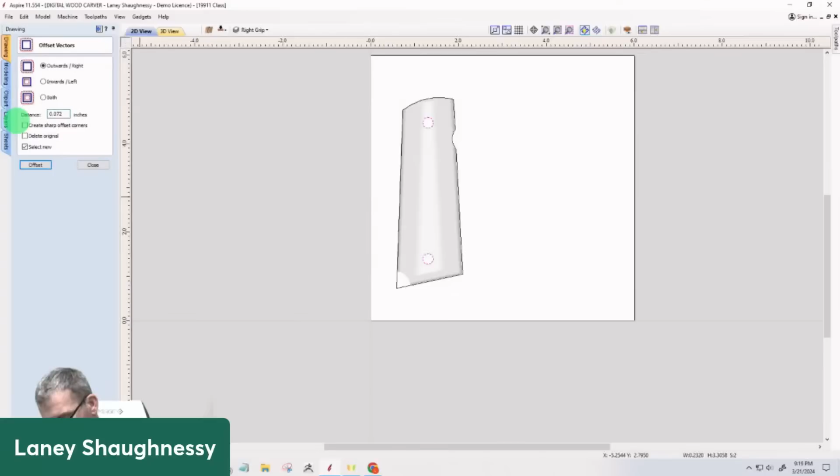Offset outward: 0.304 minus 0.232, divided by 2, equals 0.036. I should have remembered that from last time, but I didn't. Offset outward. Okay, that's going to be my countersink for the screw head.

Inside vector and profile. Inside vector and profile will get copied to the other side for the pocket holes and all that stuff. But first, we're going to do the same thing we just did - recreate the shape because we're getting rid of this one. Save it, Laney. Yeah, save.

Good, thank you. So keeping everything here, right? The only thing I'm going to do, I'm going to work off this side because my left is on this side, right? I'm done with the model - I've got everything I needed from it for now, so I can move it over here out of my way.

And I'm just going to work off this. I'm not going to make copies or any of that stuff - I'm just going to use this as my original. The only copy I'm going to make is my 2-rail sweep copy, so I really only need this outside profile. Control C, Control V, copy and paste. I'm going to right click and move that to a new layer, and call this my right side 2-rail sweep vector.

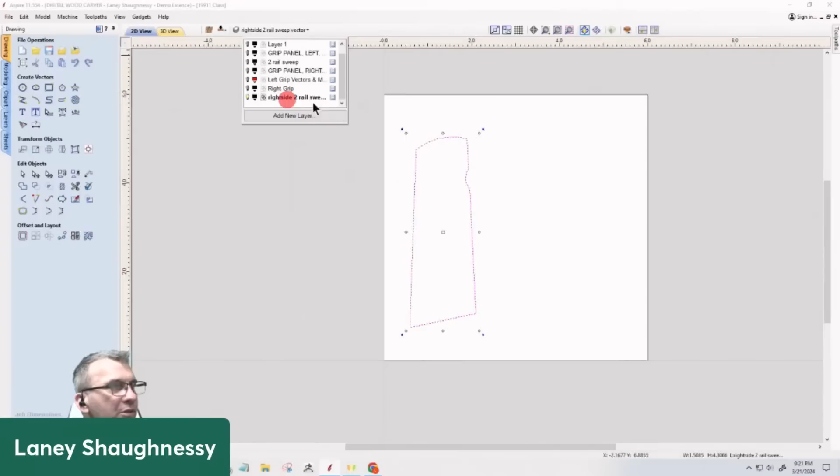Turn everything off except for that new copy. It's all what we just did on the left side - we're just doing it again. Node editing. Cut the vector. We got a little bit of a kick right here; I'm actually going to delete that point to get rid of it.

Cut the vector here. Cut the vector there. My delete button was not cooperating with me - there we go. Cut the vector on this corner.

And here, now I don't have to cut the vector on the corners - there were no nodes in between. I could have right-clicked and deleted that span instead of just cutting, so many mouse clicks and all that stuff. I could have right-clicked and deleted the span, right? But I just didn't.

Now, this arc is important for when we trim this model, okay, but it's not important for the 2-rail sweep. For the 2-rail sweep, I need a straight line. So I'm going to - no, don't do that. Cut the vector here and there.

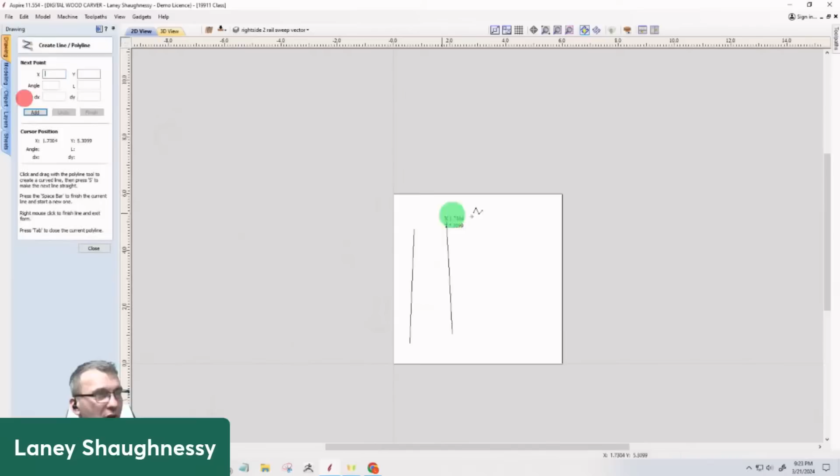I'm going to select this vector and join with a straight line. And remember, I still want to extend it past the grip length, because I'm going to trim to it. So I'm going to draw - I don't think redundant is the right word - I'm going to draw just waste lines to help me extend to.

It gives me a point to extend to, and then they get deleted after the extension. So I'm going to extend this line to that line, this line to there, this line down to this line, and the same thing here. Once they've served their purpose, then those two lines can go away.

Now, Ronnie, would you agree that the heights and everything are fairly consistent as far as if I use the same vector for the sweep? Would you agree? Yes, yes.

Okay, all right, so I'm going to copy this vector over to my 2-rail sweep vector for the right side. And that way I can turn off that, and I've got this here. I'm going to assume that my distances would be the same, so the right distance and everything on each side. So we're going to just go into the 2-rail sweep.

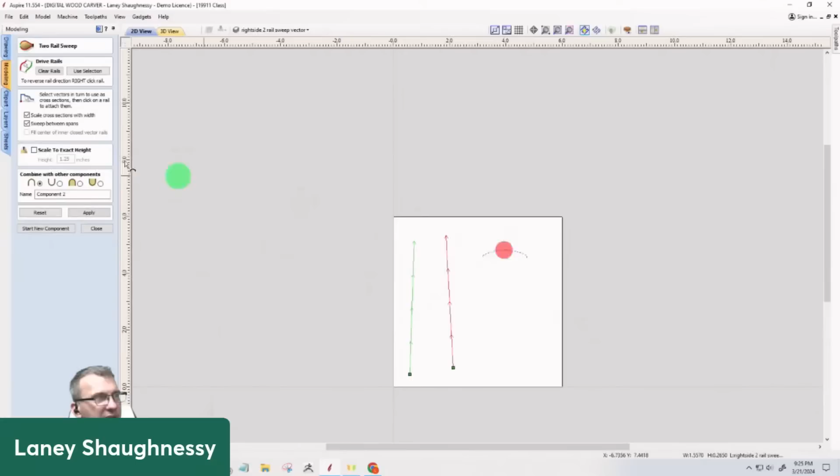Let's select this rail and this rail. Now these lines are going in the wrong direction, and I would like to sweep from the widest to the narrowest point. So I want to reverse this rail to put the start points so the arrows are facing the same, going from wide to narrow, to narrow, to narrow. So now, with that being my selection, this is going to be my profile, and we're going to apply that.

Okay, now we're here, and let me turn off the left one and everything. And we'll turn off the right. We don't need that right now.

Here, once again, we're at that kind of 1/16 of an inch based on the lines that we drew. The properties tool, if you recall, we took that, Ronnie, do you remember the number 0.08? Yeah, 0.088. Okay, we took that 0.088, subtracted the 1/16 of an inch that I had already, 0.088 minus 0.0625. Okay, that gave us that 0.0255, same number as the other one. We're adding that extra height in here.

And once we've done that, now we can come back into our vector, right? This vector here, we can select this model, and we can clear everything outside of that vector, right?

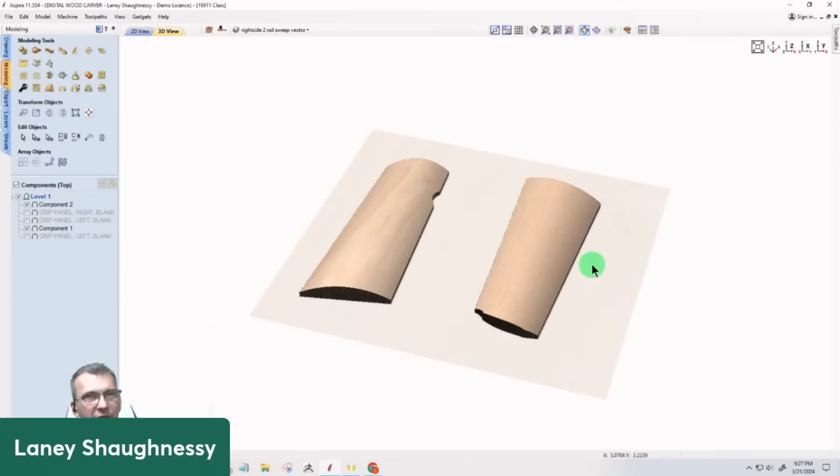Okay, we have our clean models and everything, and our screw holes. We don't do them ourselves, but the CNC does them, but they're pockets. They're not part of the 3D rough or the 3D finish. And then the only thing we need to do remaining is the other side, so let's switch to the other side.

Okie dokie, and on the other side, we have this here. Now, of course, this is still in the center where we imported it in, just because we moved the model over. When we created the, when we moved the top side, side one and everything, the bottom side doesn't move. It's still waiting for us to position it and everything.

So I can't see the model here because that particular layer happens to be turned off, right? And so here, I'm going to grab it right in this corner, snap it there. Let me zoom in -- missed that snap completely by a mile.

Still slightly off. Let me zoom in. All right, so when I can't see on the model, right, the lightness and everything, there's not a whole lot I can do with that.

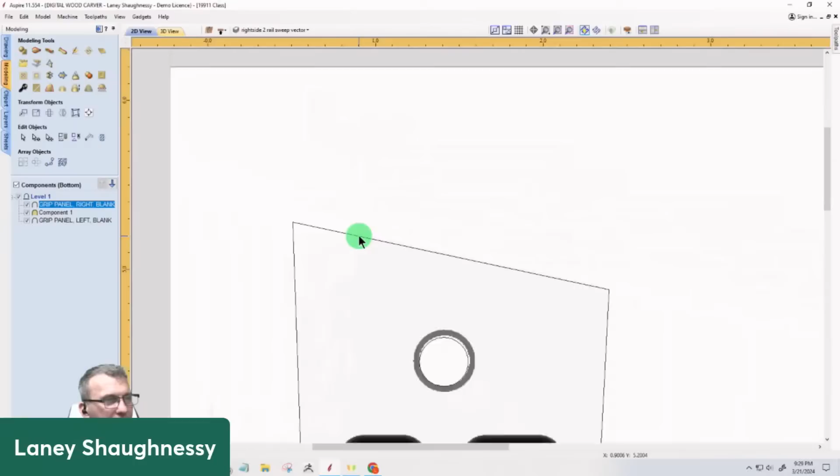Bear with me just a second, I got to get...

This is the part that I dislike very, very much. And that's why we're not using this. This is just a working model, it's not our finished model. I just want to kind of -- I really don't need to be doing this.

All I need to do is get my vector number, my number for that vector. So I'm wasting time trying to get this lined up with that vector. But if I really want to, I should be able to take and select that model, select that vector, align to the center.

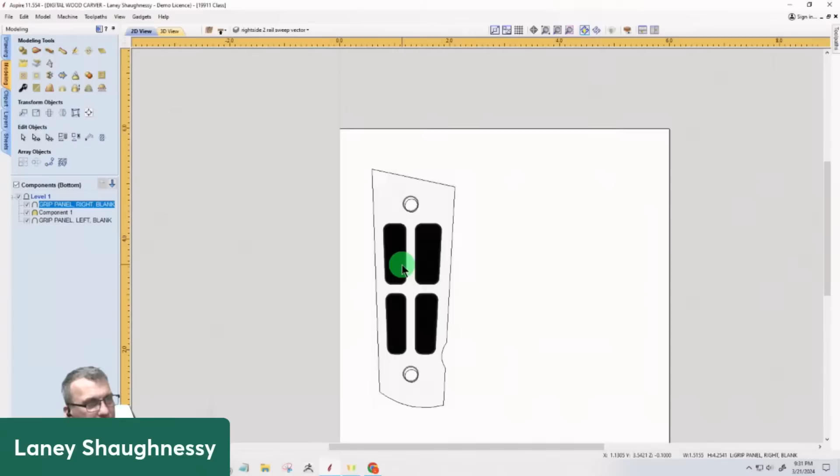No, definitely not. All right, let's move that over here. Not the boundary -- come on, Laney, you know better than that. Just the model. All right, all I need to do is trace like a picture, that's all I'm trying to do.

I'm going to go to 75. That's kind of my lucky number. Preview, apply, and close.

Now the vector that was created for that recess is coming in. I'd like to use the same numbers that's on the other side, the left side grip, but this is coming in at... ungroup.

0.232. And I believe we used 295 on the other one. Let me find out. Give me just a moment. Turn on my left grip vectors. 0.295 is what I use.

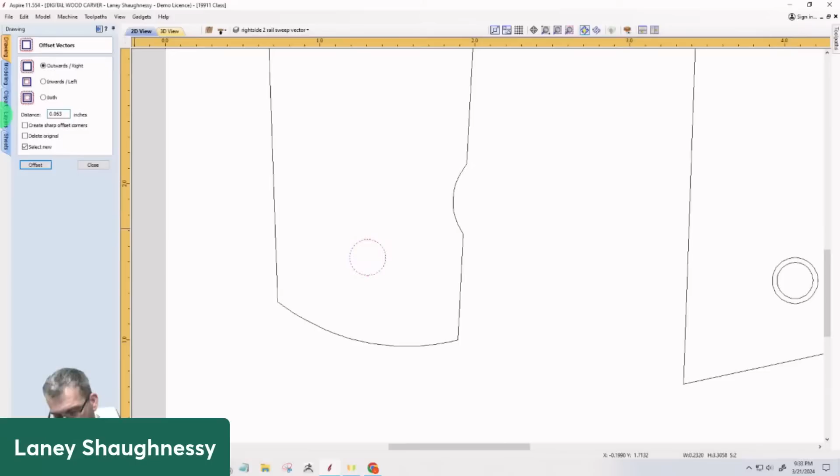What was that number? That was a plus, not minus. Let's try that again. 0.295 minus 0.232 equals, there we go, that's more like it, divided by 2, offset.

Okay, now on here again, this is the bottom of the grip, so we don't need - honestly, what we did on the left hand, showing you how to get rid of those inside pockets, we don't actually need to do because that's not going to carve. We're only carving the 2 little recessed pockets here, and then this board's getting flipped over. We're carving the model of the grip and then the profile cutout. So those pockets aren't going to be part of it anyway.

But I wanted to demonstrate how to remove those by removing that material, offsetting the vector slightly, and rebuilding it flat and merging it in to get rid of those pockets, right? So at least you know how to do that if you ever needed to, but you don't need to. This isn't, they're not going to carve anyway.

So we have our vectors now for our left grip and our right grip. And again, this, you can make any size piece of material, right? You can, if you have blanks already for your grips, like some rosewood or whatever, and you want to do one thing at a time, that's fine. Just give yourself some type of space or room for alignment pins, for flipping. That's going to be the critical part.

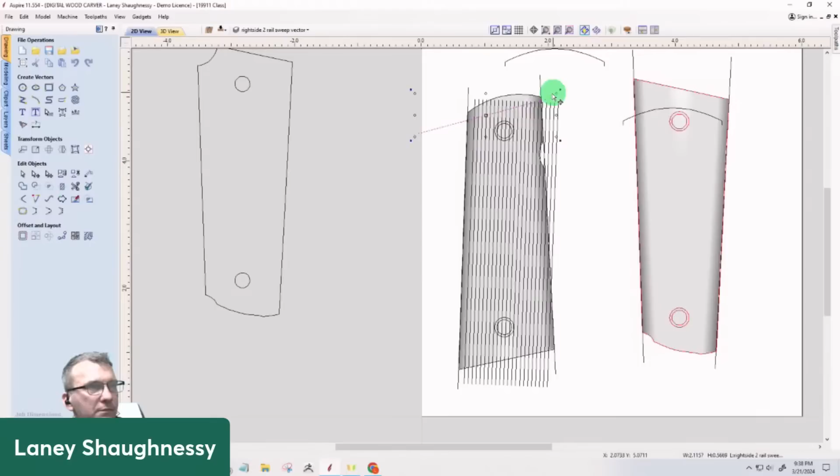And then the vector here, I come in and offset that - again I'm going the wrong direction - and offset that across. Basically I would make my line a little bit longer so that it, give me just a second, this will make sense. Let me make this line just a little bit longer. All right, let me offset that across. Did I make it long enough? No, that's okay, I'll just stop it right there for this example.

Now let's say that I take these lines, I select all of these lines here, and I select my profile, and trim, clearing everything outside of the profile away. Then I select my vertical lines, select my profile, and trim, clearing everything outside of the profile. And then basically what I've just created is kind of a hatch pattern.

Now this hatch pattern would be a profile cut. Let's say that I cut a 32nd inch deep, 0.03125, and I'm going to use a V-bit - a small angle V-bit. I don't want too narrow a pyramid, so I'll just use 60 degree. Select, and I'm going to be on the line, and I calculate this toolpath.

But now I can't just calculate the toolpath - I have to, when I calculate, project it onto the model. It has to follow the curve of that model when I calculate it, so that when it carves... and it's going to look like crap right now because the model actually isn't there. Let me turn off the color, but ignoring everything outside right now.

And you see those sharp points, we would want to dull that a little bit. I can show you how to do that, but it would create kind of that textured grip. That's one way you can do that. Now all this wood's going to get milled away, and it would just be a flat groove. So let me just do it real quick.

I'm going to turn off, I'm going to select that, I'm going to do a 3D finish. I'll use a 1/8 inch tapered ball-nose - actually 1/4 inch would be good because it's just smooth, there's nothing there - using the selected vector as the boundary. I'll let it go past the boundary by 1/8 of an inch.

Calculate, give it just a second, this will make sense when it all mills away. I believe they call that checkering. All right, preview that toolpath. Okay, and of course my lines would go the whole grid - I only selected a few of them, but I didn't have all the vectors selected.

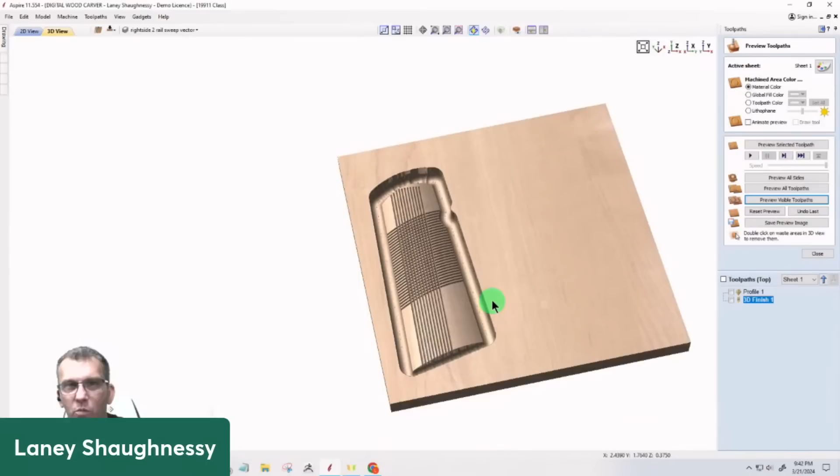Could you use the texturing tool, Laney? Sure, yeah, you can use the texturing toolpath. It's going to create a random pattern. It won't be - this is kind of a consecutive pattern - it's going to create just kind of a randomness.

But yeah, you could. Now if you put a vector, say a designed vector, inside that outside vector, you could do your checkering just into that, so that you would still have a smooth area all the way around. Yes, 100%, absolutely. What John is referring to is, if let's say I took my grip profile, and let's say I offset it inward a 1/2 inch, just as an example - oh no, 1/2 inch is going to be too much, let's go 3/16, 0.1875.

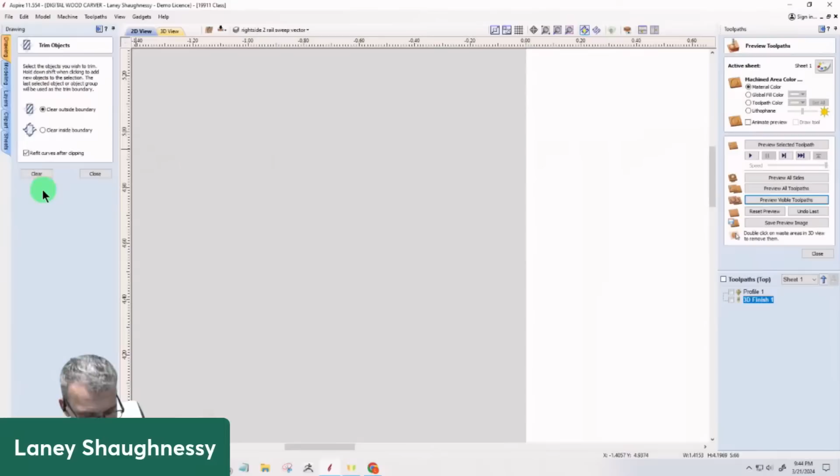So on that, when I select this checker pattern - bear with me. Let me turn off these circles real quick. So if I was doing something like this, I would select the vectors, I would select that inside offset, and again it would be the trim tool, clearing everything outside of the vector away. Oops, wrong way - inside, clearing outside, I chose. Let me hit undo, Control Z, make sure I clear outside, not inside.

And I could have that smooth outside edge, but I would have that checkering in between.

And again, I didn't finish the checkering lines and everything. So that grid would be all the way down, or it would just be in a certain area, maybe between the two grips. You can create any design, any shape you want, and checker within there, or what have you.

If you pick the circle hole, the outer circle, and the inner circle, you can clear that, and that way it would leave a clean rim around the hole. That clears away those vector lines around the hole, so the checkering doesn't go up to that rim. It creates a nice smooth area, however big you want it, right on the outside of the countersink. So a lot of things you could do from there.

So here, and Ronnie, I hope I'm answering some of the questions you had on this. Okay, so what we have now is our left and our right smooth, right? No screw holes or anything in it, not counting this sample right there. Let's get rid of that. We have our smooth. We've gotten rid of our chamfers and everything.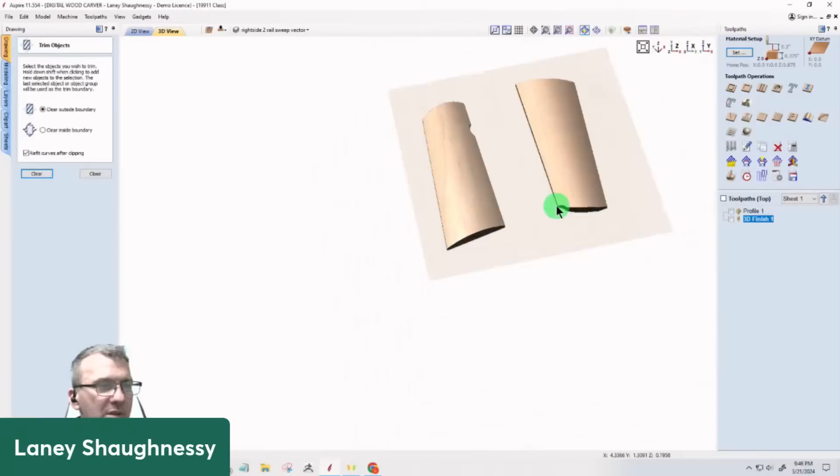Now that's something you could add in, or something you could just ease over with a little filing, if you wanted to put a little bit of a human touch to it, ease over the edges if necessary. But like you, I don't like that chamfer going up on the grips.

And on the bottom side, all you're carving is 4 little recesses, 2 on each side, just the recess that goes over that little stud, that's all you're carving there. Then your alignment holes, you move the board out of the way, drill your alignment holes for your waste board. That board gets flipped over and pressed on those pins, put your dowel pins in, and now it's all the model carve, the pocket cut for the screw countersink for the head, and then the through hole that goes through.

I think on the back side, on one side of the grips, in addition to the pockets for the screw and the recess there is for the thumb safety, there's just a small amount, not right there, it's at the top of the grip on the back side. There's a small bit of machining that takes place right there.

Yeah, here? Yeah. That's why I was wondering, when I was importing the model originally, I was kind of setting that horizontal line to be right there at 0.00, that 0.088. I was bringing the model up so that it would allow me to machine that part, but wasn't sure if that was proper or not.

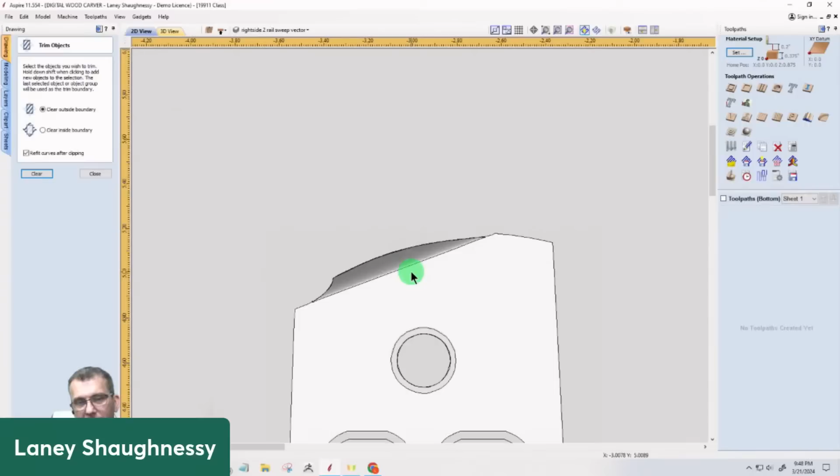And what we would need to know is just from the bottom of the grip to the deepest point of that relief, if you will, what that is, because we have to add that to the overcut distance so it'll allow it to carve. That's the only part of the 3D that you would be carving on the back side of this model. The rest of this is not 3D. There's not a single 3D carve in any of this except for this little bit right here.

And that overcut would be like 0.137. Okay, and I would set that up when I'm importing. Yeah, so at that point you would need to have this side 2 model.

What am I on the bottom side here? Give me just a moment.

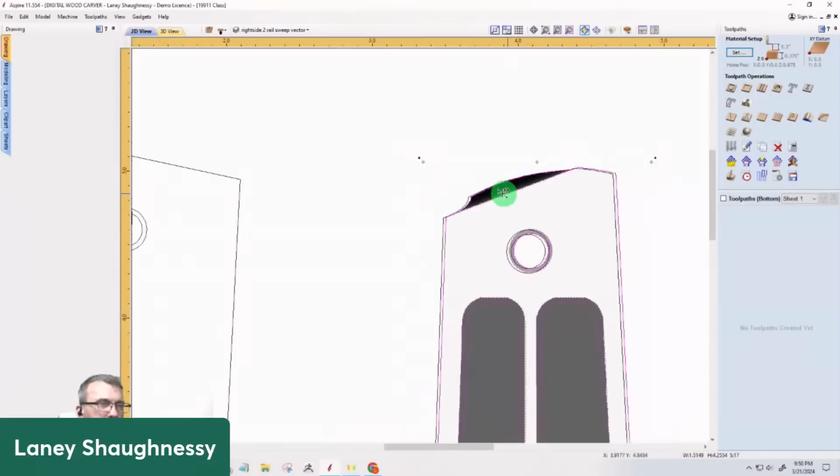So you would have to... give me just a second here. Okay, all right. So from here, I'm gonna get my tools back. From here, there's a straight line that goes up to this point here, right there.

And that vector creates the vector for that relief right there. And the...

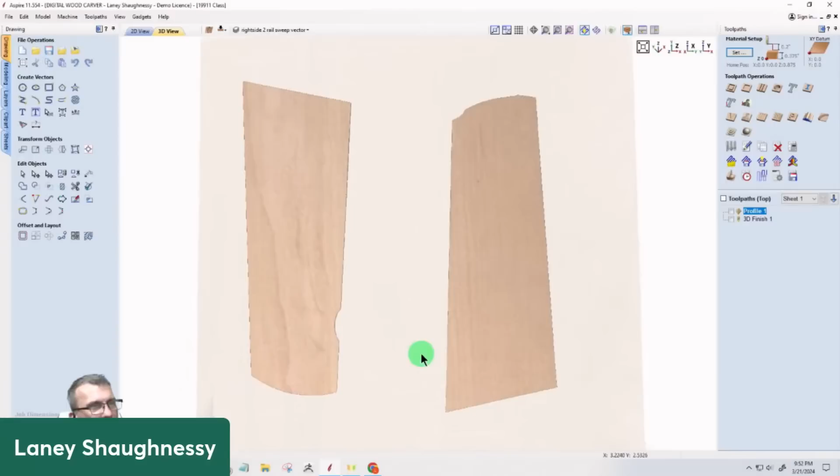Give me just a moment. Okay, let me flip this over here. Okay, so my top side in this example, you flip it to where it's flipped. All right, top side's top side. Flip over to the bottom side. Okay, and when I'm looking at this, that matches up. Okay, now...

This area right here is a relief - it's hard to see with me behind my name tag and all, but it's a relief that from the flat, it's angled kind of down and away from the flat bottom of the pistol grip. This is down and out, it's an angle down and out. And you're saying, so it's because of the angle - I don't know exactly what the angle is, but it's kind of a chamfered cut.

And I could literally... I could literally. No, it's still all - I have to have an overcut distance because that's still side one. This chamfer goes into side one, it's the back side of side one. It has nothing to do with side two. So the software won't let me carve that model toolpath if I don't have the overcut distance.

So it's got to be done, I mean, at import. So let's add a new layer, turn off everything else. Import that left side grip because it is the left side grip that has that.

Okay, when you see this, Laney, yeah - could you import, because I know we're going to be running out of time, but could you import the left side on the new file? Just so I can show you, you'll see that same relief right there, but you'll also notice now that we cut out that corner cove - you'll see the replacement with the small recess for that spring, for that mainspring on the left side, on the new one.

So you'll see that same relief there, and then down in that bottom left corner, it's really minute, but there should be - they don't have it on there. I've got to add it. I don't see it on there. Oh, that's interesting. But there is a small little recess, and it's a very small recess. What's it for? For the mainspring that goes down the backside of the... yeah, it's like...

0.025. They cover that along the... does it go along the whole back side? No, it's just in that bottom corner, and it's only like - what did I just have it set to? It's - I mean, is that something you take a file and...? No, it's just like 0.026 deep, and the diameter is like 0.139. It's very small, but there's like a pin that goes through the bottom of the gun there that holds that mainspring that attaches to the trigger. Yeah.

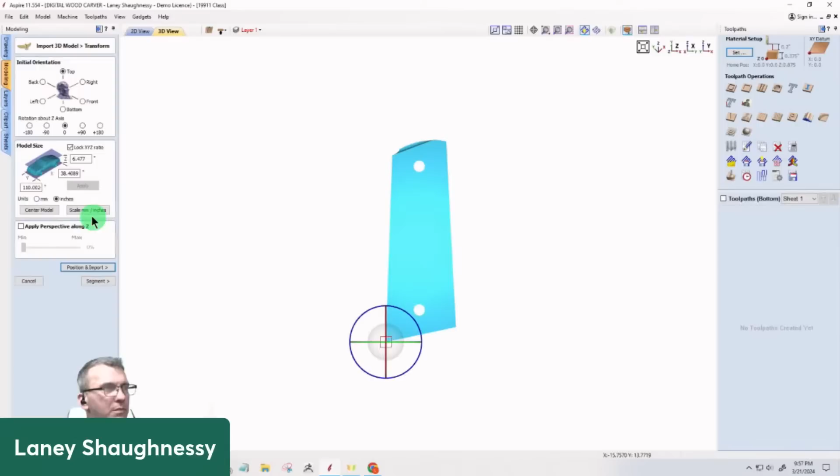I mean, is it something that can be tooled away? Is it just material that has to get removed? Yeah, it's almost like the recessed holes for the screws there, right? It's just a small recessed pocket that's in that very bottom. Yeah, I'd have to - and I don't know why they don't have it on there. But now that I'm learning what I am here, it would be easy. It looks like that, it's just an independent vector.

Right, because... but that's just to show you, what you've created right now is very similar to how at least needs to look moving forward, where you don't have that cutout there, that cove down at the bottom, but still have that piece there up at the very top. Excuse me. And give me just one second here.

Okay, so here, all right, let me see if I can turn it on its side. This area right here that gets removed, it doesn't look like a chamfer, it doesn't look like anything. It's like a little pocket cut. Yeah, that's how I see it. Like there's a cavity.

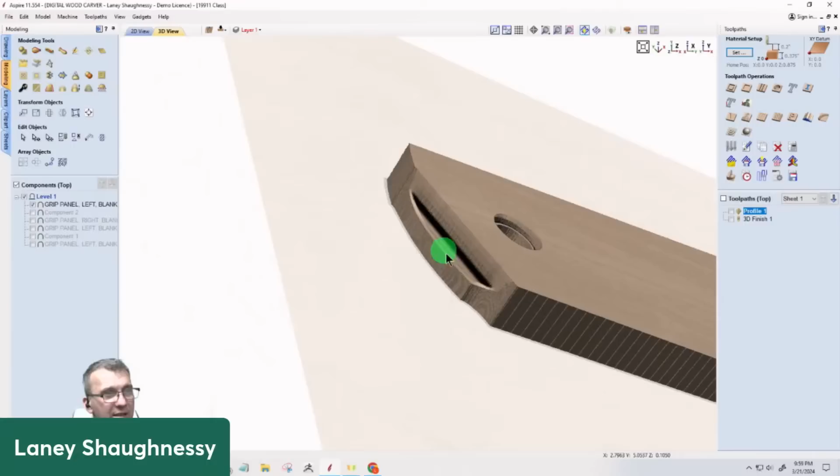You can't do undercuts, so that's not going to happen on the CNC, period. You can cut down and create this relief right here, but you're not going to be able - that's cut into the grip, there's a recess like a cave in here that goes down in. You can't get to it, you're not going to be able to get to there. I don't know, is that supposed to be there? Yeah, it should be there.

Come in with a splitter saw? Yeah, it's gonna have to be - you would have to do that with an oscillating saw to remove that material. But there's an undercut in there, you're not getting that with the CNC. You could do it with a slot straight-down cutting router bit on a router table.

That would be a little tricky because of the way it closes up right here. I would use a die grinder - it's not straight across. This has a little bit of a curve up right here, but that recess is still back into there. It's pretty small. I may just take one of my rasps, or a die grinder, or Dremel tool.

To relieve that pocket out, do a slice first and then come down and do the pocket. That way you can get the ridge.

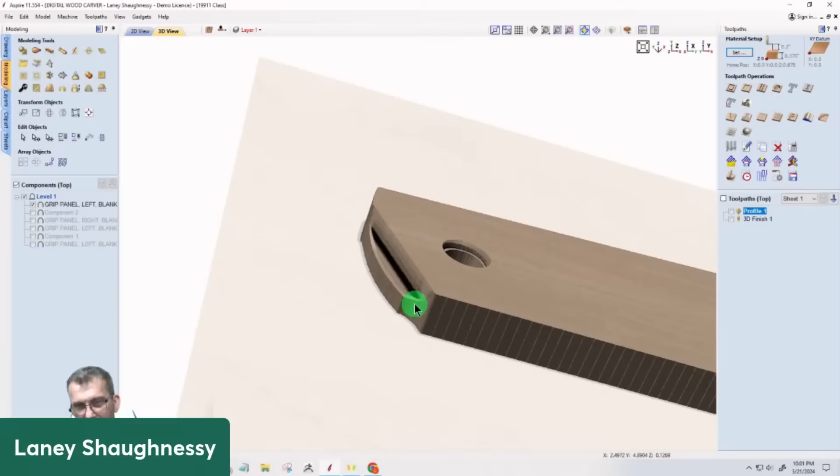That almost looks like where you take a biscuit joiner or something, right? Right, yeah - that's not actually going into the wood there. That dark space - there's no pocket right into the wood there.

I don't know why that dark spot is there. It's not look like that when you zoom - it's not a dark spot, it actually goes back in. That's a hole, it's not just a dark spot.

I'm holding the grip in my hand, and there is no undercut, but there is a pocket here with a lip all the way around the outer edge. So there is a pocket here. Yeah, right. That's a 3D cut. This is a little small.

So otherwise to do that operation, you'd need a 4th axis, right? I mean, you'd need something for that. Or what the guys were saying - cut your slot. JR had a good point of doing a slice using the same thing that John said.

John, you were the one that said the die grinder. Charlie was the one that said a T-slot bit. Yeah, cutting the slice and then the pocket.

That's correct. So this cut, in order to cut down here and everything, the overcut distance - because this is zero, whatever the depth of that is, that's what you have to set your overcut distance to. It allows the router bit to carve that.

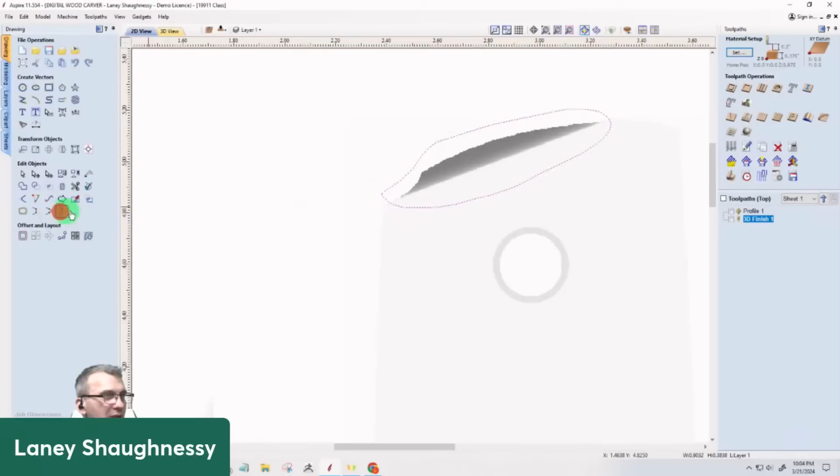Give me just a second here. It's still a 3D cut. So you would just do that, and you would do a 3D finish cut using the selected vector as the boundary. We don't actually even need to let it go over because the vector is bigger already.

So when you calculate that in the wood, preview the visible toolpath, it will create that. And then when we do the profile cut - bear with me a second, I got to create my profile toolpath.

We'll cut all the way through. A quarter-inch end mill's fine, on the outside of the line.

Oh, hold on a second - my bit was way too big. What did I use for that 3D finish? Hold on just a second.

Definitely don't use a 1/4-inch ball nose. We need the smallest, best possible - a 32nd would be good, but I don't have one programmed in, so we'll use a 16th for now. Let's calculate that again, one more time, and reset the preview of the visible toolpath.

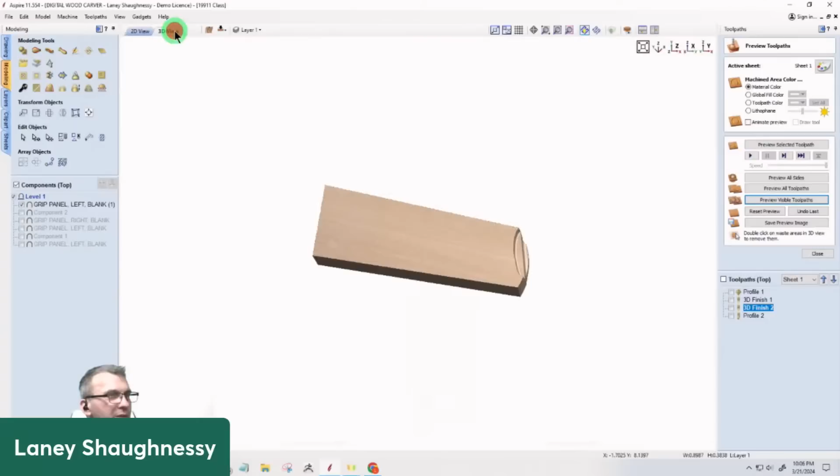That's because you went over on your vector and it cut inside the straight part. You know what I mean? When you overcut it, you have to cut it to the line on the inside because that's going to take all that material out that you don't need taken out. You just need that little end that's there. You made your vector bigger. See how big your vector is?

Oh man, it should have done the flat work up here. What are we talking about? I got it, hold on a second. I see, said the blind man. Let's see, click here to there. Use my scissors. There you go. All right, one more time.

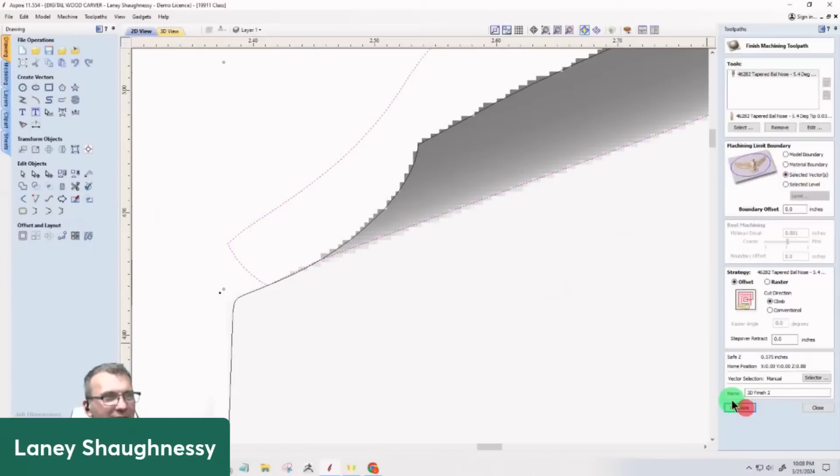All right, preview the visible toolpath. The 1/16 of an inch ball nose is still too big, and my line is still overshooting a little bit. I think the 1/16 is just too big, it's just too small of an area, you know what I mean? 32nd, gonna have to, because I'm still hitting even though my line is up against there.

But we're not going to have enough time to dissect that one. I'd have to work with you one-on-one on that. But for the most part, I don't know if anything that I showed you is going to help you, but hopefully it does. Yeah, it does, big time.

And I have no problem, like in your gold meeting, your monthly gold meeting, your one hour, if you want to schedule a one-on-one with me and we actually create your models and your toolpaths and everything, I have no problem doing that. But we've got to be able to cut that without cutting into our other model and everything, so a very small, maybe a 32nd inch with a 64th inch radius to get in there.

Otherwise, I don't know, get out the PC board bits, a file, yeah PC board bits, those little boogers. All right, let's close this, reset that to a blank and close it.

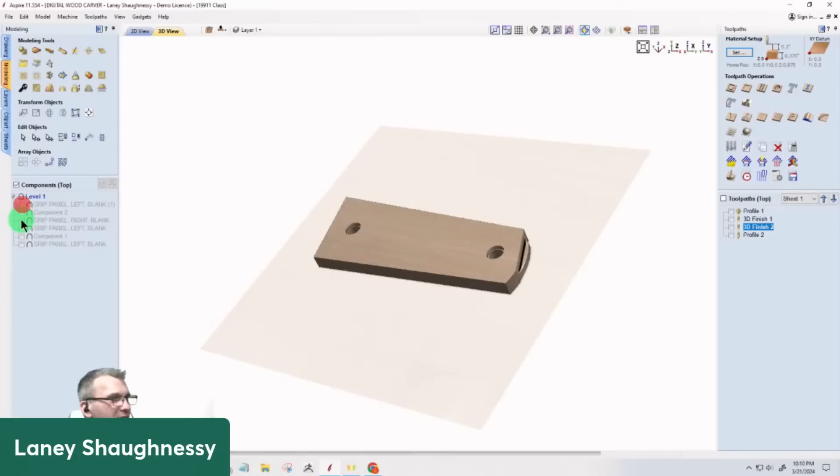Save work. With me now? Yep. Well, it's been super helpful. I really appreciate you putting this on the docket for the class tonight.